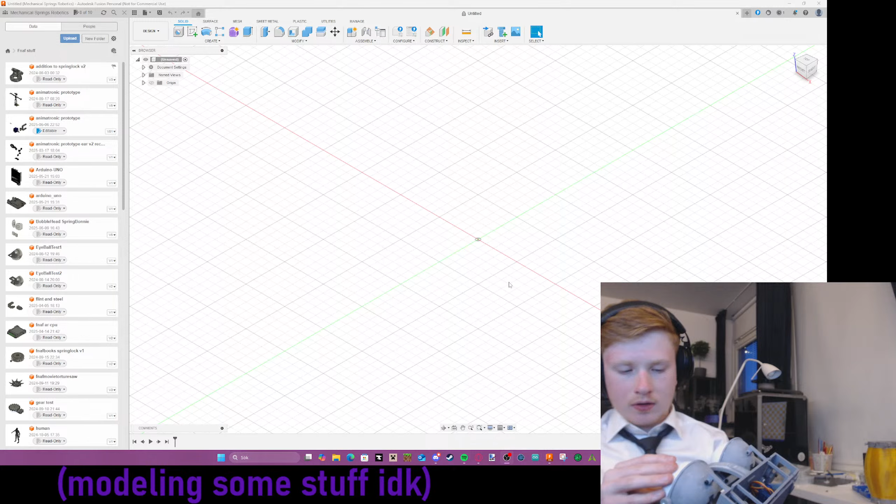Oh yeah, I forget. Sanding is a thing, but I haven't done that yet. And I don't want to do that right now because, sir, you know I'm a lazy man. I do not do stuff that I say I'm supposed to do.

Yeah, sir, can you let me put on your eye? Yeah, there we go.

Oh, I know what I should do. I should finish the new jaw model idea I had, like having pistons on the side with springs.

Voice crack it down. Springs. Kind of funny making voice crack. Voice cracks, not noise cracks.

Sir, what springs shall we use on your thingy? I don't even know how big I can make the thing. This is too big.

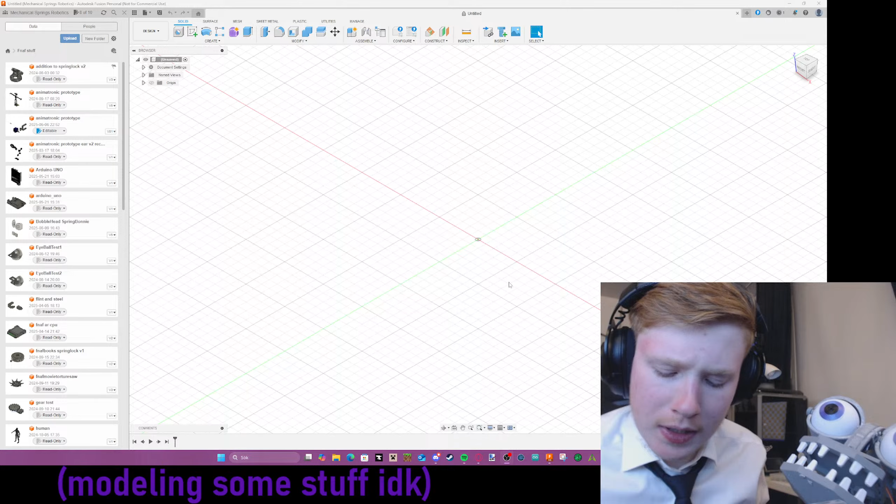But I need it to be strong at the same time, and I need to have a lot of them so I can make more of you. That's not strong enough.

What if I just put springs on your jaw? This one could work. I have a lot of these, and they do reach pretty well, and they're pretty small, so they can fit inside a part.

Alright, should I put you like right next to me? No, that won't work. You... Oh, damn, you can stand there. Don't really stand, but you sit there, while staring you guys down, or whoever's watching. Time to open the funny of my 1.5 years of pain.

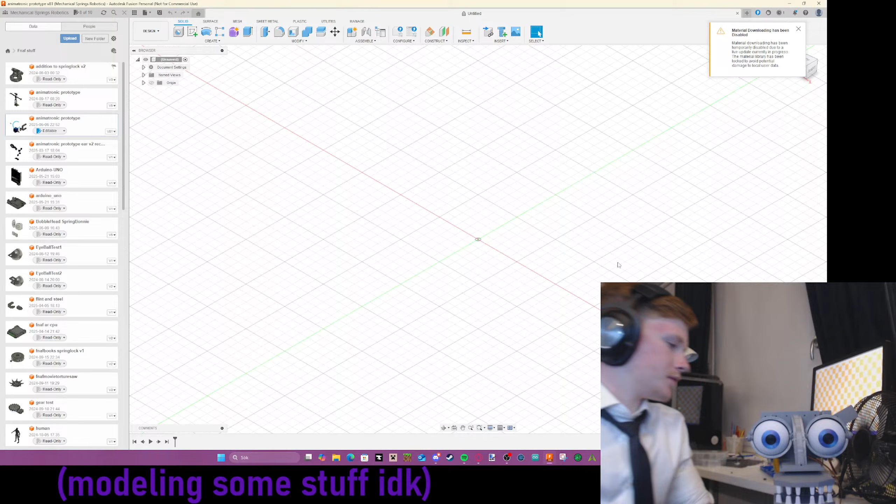Yeah, you're beautiful. One reference is out of date. Oh yeah, I forgot about that. I don't even use it that much. Did I have a different version that I didn't save? I'm pretty sure I shouldn't have.

Yeah buddy, let's do one of these so we both can fit in the screen. You're taking up a lot of space.

Anyway, how smooth are you? Yeah, this part has to be a little bit sanded. This part is like done though. This middle one. Damn, I'm so fucking

full from eating cake because I just started summer break from the end of middle school, and I just remembered I have a fan right next to me. That's why it's so hot in here, and that's why I added the fan, but I never started it.

Hopefully my mic doesn't sound too bad now.

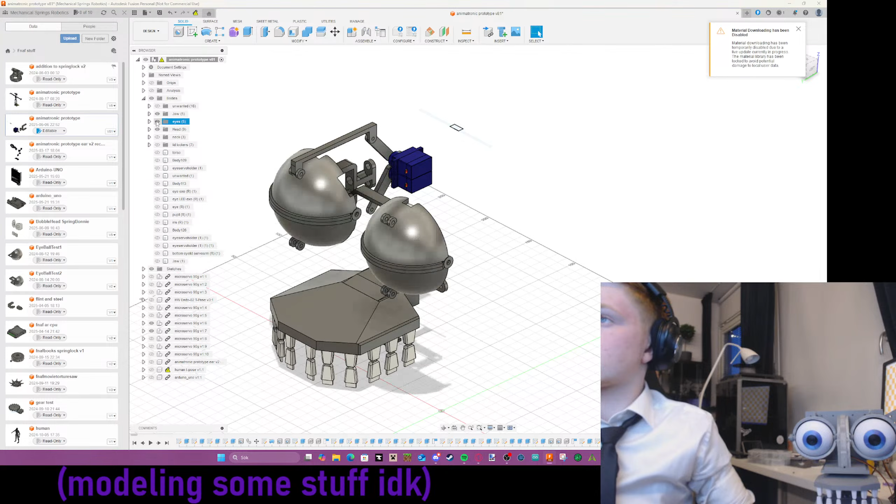How about a bit the jaw? The eyeballers. Where's the bottom jaw? Here it is. Both this jaw and the other jaw works. I just gotta add holes.

Actually, should I screw holes into the side of your thing? That's printed flat, I think. Yeah, then this is not printed flat, so it might not be possible.

Wait, what the hell? That's weird. Alright, let me just hide this thing on the side. And hopefully I can see if okay, my stream looks decent enough.

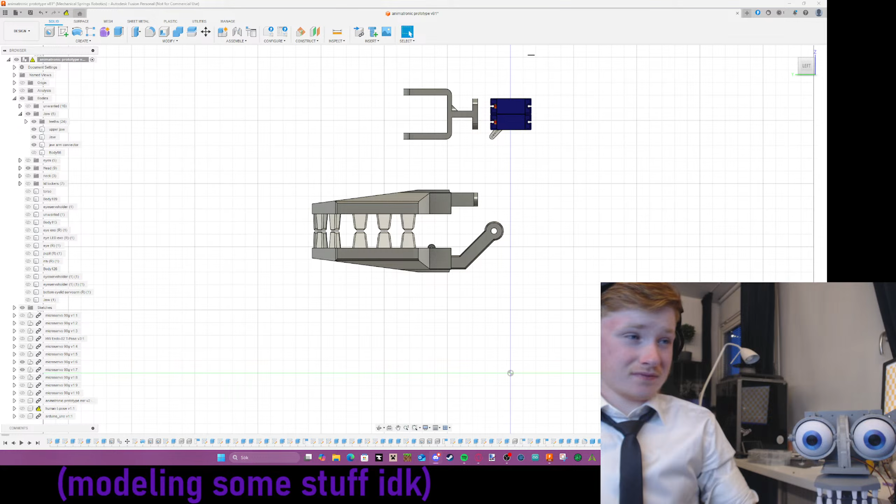Whew, alright, yeah, maybe I should... what I said before to myself, that I shouldn't have headphones on because headphones, they can really last for a long time.

How should I do this though? Since I want to get the middle points of both of those at the same time, maybe I should just start out doing the top jaw because this one will always be the same. So I can't select the middle point, but I can make a middle point by doing this.

First obstacle, what screw do we use? I'd say we use a screw that fits this spring, the hole of this thingy.

Okay, maybe you shouldn't be so creepy and hold your eyes widely open. There, be a chill guy. Oh no, don't, that's not very chill. That's not, that's not chill. Yeah.

My screw. My screws. My screws.

I don't like how you're wiggling. Okay, I don't know, is it the fan that's blowing you side to side, or is it the table? That's the table. Okay, it's the freaking table.

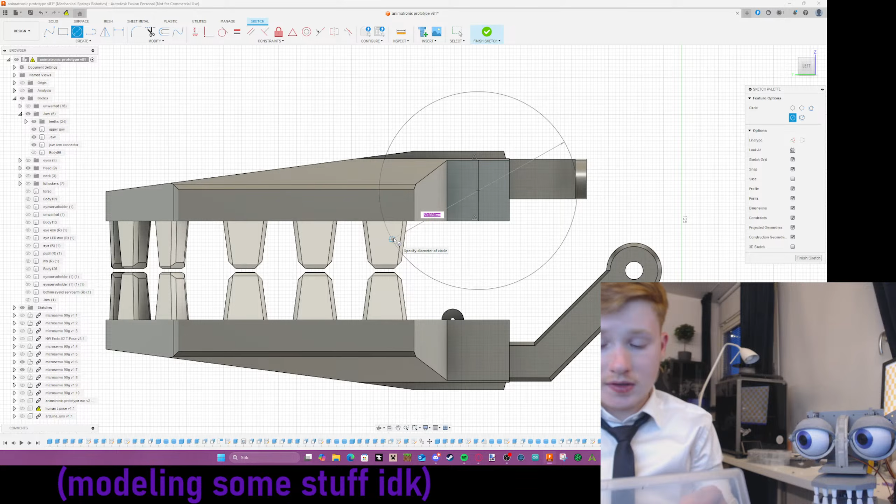That does not fit in there. I think this size fits in there. Yeah, no, it doesn't. I mean it fits, but it's just itty bitty too big, and I don't really want a lot of friction. The smallest one works, and it just fell randomly.

This where it shouldn't be. Let's check out secondary... thingy, but my desk is so freaking messy, so I can't rotate it that easily. Is there any different size here?

That's the same as before. Realistically, I could just do this and call it a day, adding springs on the side, but that's too lazy. Which I kinda am, but not that lazy.

Let's see, are these the same ones? They are, okay, they're the same size. And yeah, this is the one that's too big.

I'm actually gonna wait, is there a lower setting? Oh yeah, is it? Yeah, it's lower. Whew, just got a bit cold. Yeah, it's still cold. I'm gonna turn that off. Before I was sweating, but not right now.

So I think I found my favorite. Just gotta double check. Yeah, we're gonna go with this one.

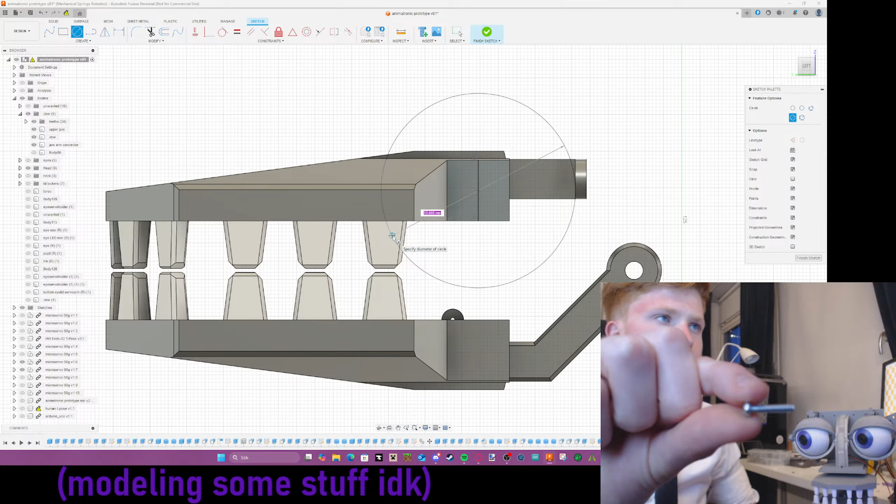Not that fun to watch a screw that I'm holding, but you see, it goes pretty well. And with more parts, it would probably go like that, and over here would be where it actually connects to the jaw.

And I got longer ones, just in case, if that doesn't work.

Okay, I might have found my actual personal favorite. This one is just one size bigger, and apparently this one can screw on, which the other ones that I have on my desktop desk does not fit in there. But this one does, apparently, if you screw it on, which you see is also much more sturdier. Doesn't really wiggle a lot.

And there should... yeah, right here, there's a longer size. Just a small difference, but that can do the trick. It really can.

Let me just double check. I just remembered, I don't need to activate desktop sounds because I'm not using any headphones right now. Let's just see real quick, any new messages? No, just had to double check because I don't have my headphones on.

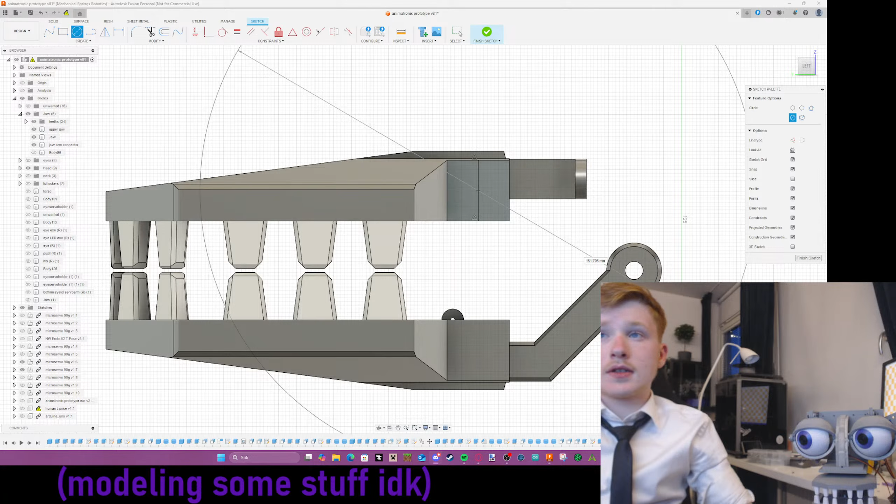Let's just double check here. That's good, that's good. Okay, so we know which screw we're using.

Oh, there was a... that's good I didn't drop that screw that was stuck on this thing. Let's open up OBS again, just in case.

Let's check here, how big is this? Guess we want... oh, no, I remember also why I wanted to get a higher size, because these thingies are like threaded inserts. You can heat them up and put them in plastic, or any material, and you can screw it on like a bolt.

And I only have it in one size, so using this one would work, but using this one that we had before, we just slide in. I could have made a crazy sexual joke about that thing I just did, but let's not do that.

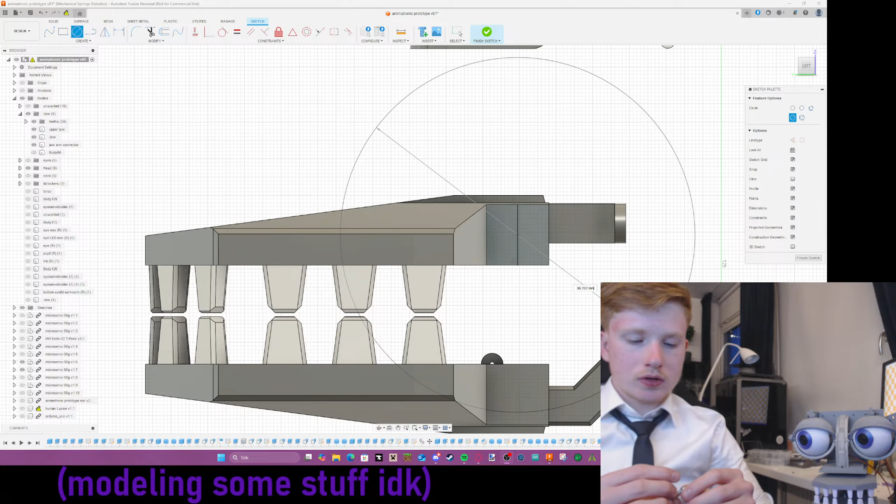So I'll use... ouch. I'll not be measuring the screw, I'll be measuring the heated insert, aka the tippity top, so we can slot it in perfectly.

Which, let me guess, 5.6. Close enough, 5.5.

But then 5.5, but a little bit more makes it fit easier, right? So we're gonna make this. Oh, I gotta move this off my desk. No, don't fall now. This guy's just on top of a drink I have right next to me.

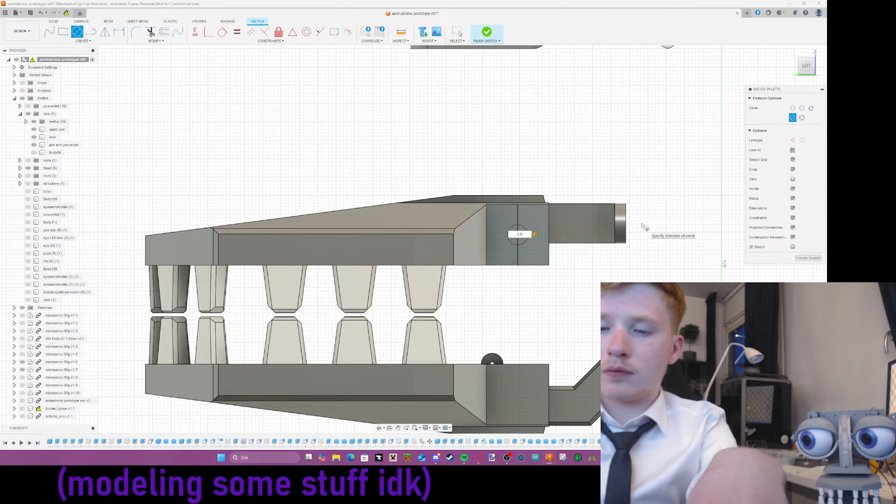5.5, but we want this to be a bit bigger. You would have like 0.1... wait, yeah, wait, I'm just gonna make it 5.65 instead.

Or actually, I usually offset it by 0.1, so it would be plus 0.2, which would be 5.7, which I think should be enough, right? Right. Plus, it's gonna be heated anyway, so it might just melt a little bit through.

So we got that done. Oh wait, actually we need the thread thing, because I need this thing to slot into a 3D printed part. Whew, this will be tough.

Okay, and why is it hot now? Why did it suddenly get hot? Alrighty, I'm just gonna do this.

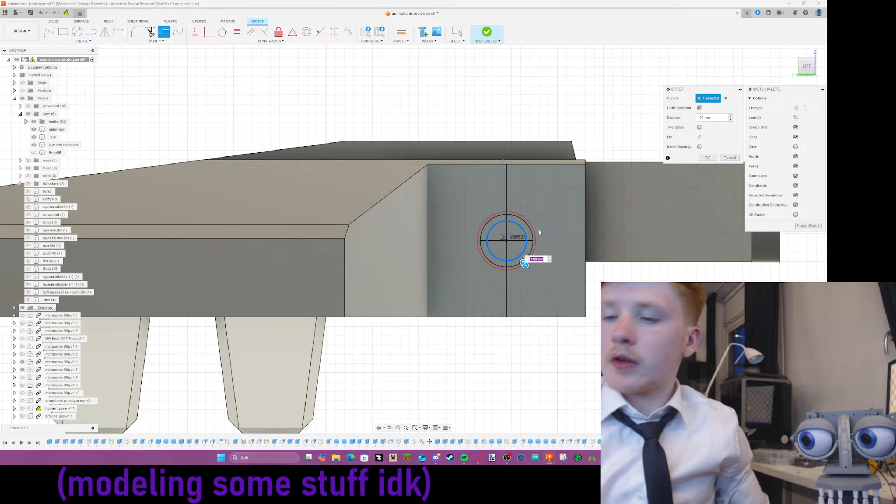Wait, we actually gotta measure how thick the ring around the thing is, so it assumes like... wait, let me guess. I'm not looking. That was 4.4, 4.3. So I would guess like 4.2. Never mind, 4.4. Okay.

Which kind of makes me... oh no, I was gonna say scared, but I'm gonna have a thing around it so it can't move. So yeah, we just needed like two.

Okay, wait. How much, how much? 4.3 to 4.1, you would say like around 1 millimeter, but I would say... what? 1.5.

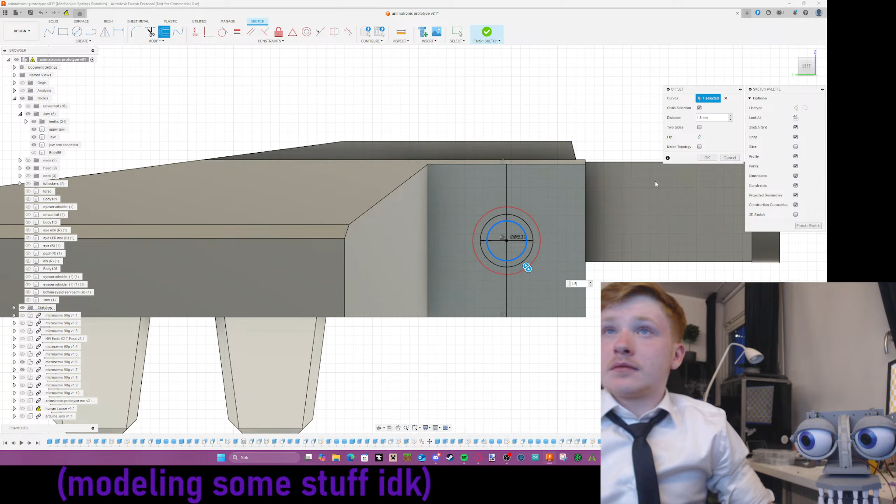No, I'm really yawning today, and suddenly I have tear liquid or whatever coming out of my eyes for no apparent reason.

Anyways, voice crack, damn. And apparently now, are you making me sick? Oh no, it must be the air blowing into my eyes, making them dry, making me cry. Did that rhyme? I don't think it did.

Hopefully I'm not speaking too low. Hopefully I'm speaking a bit loudly. Okay, not loud, but like a normal amount of decibels. I don't know.

Okay, why the fuck am I so sleepy? The clock is only 11 p.m. I usually stay up to 1 a.m. in the morning.

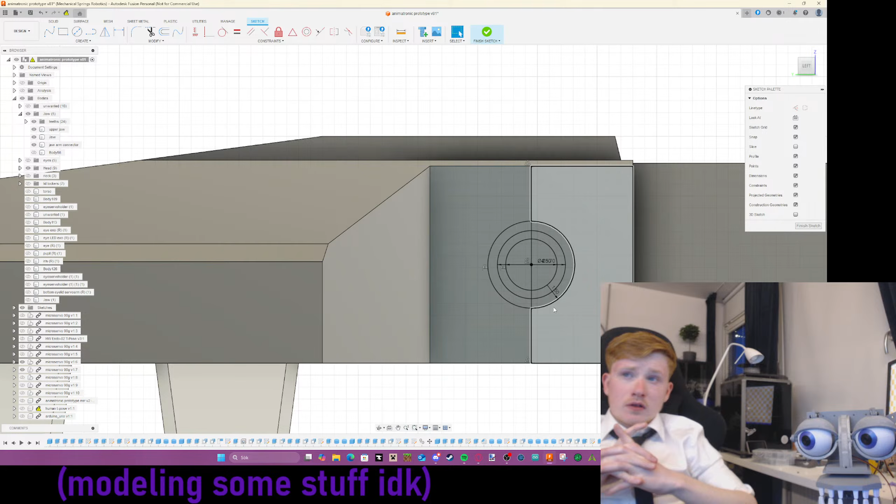Okay, we gotta think. So we got that thingy, and we got another thingy. What was this thingy for? Or was that thingy? So we need that thingy, got another thingy. Okay, I get it, I get it.

Oh yeah, we gotta offset this, the middle thingy, which goes in. No, no, no, no, no, no. This is... yeah, we gotta do it from this thingy.

So this thingy should go like 2.5, 2. Since it's only like 0.5 millimeters left, I will make this 3.5, because that leaves 2 millimeters, which should be enough. Yeah, that looks all right.

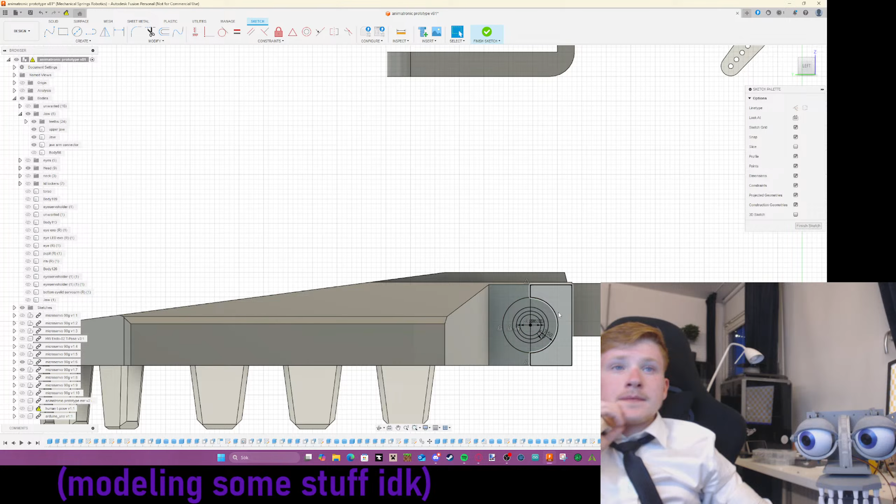What the fuck? Apparently I'm very tired. This should be it. Yeah, that should be it.

Okay, so this was the thing that goes on the inside thing. I'm gonna take a look here. Oh shoot. That's like around 8. I would make this 1? No, 10.

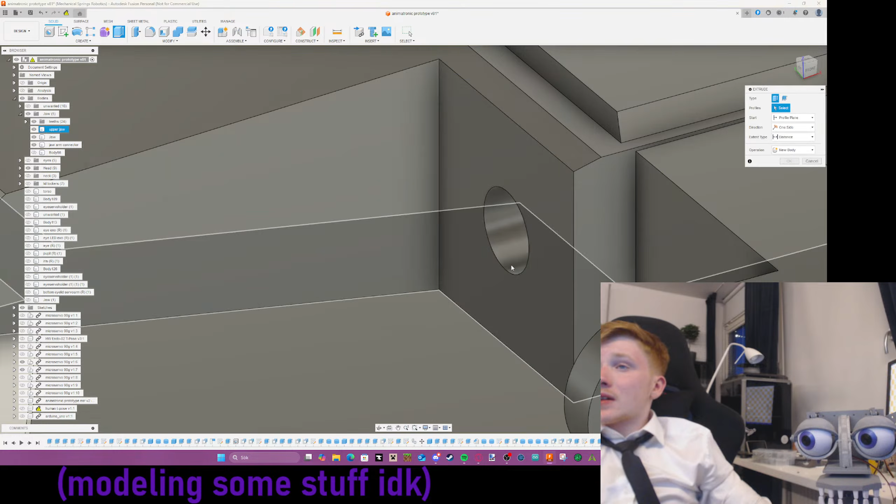Or actually, I'm gonna make it 9. Okay, no, not that way. Not that way, sir. Okay, and it disappeared. Yippee, attempt to find that sketch. And it was pretty easy because I have an old folder.

So this should be it, right? 2. Oh! I scrubbed your eye. I'm so sorry. How did you even fall? No idea.

2 millimeters. Okay, that just made me think of something else, but that's not true, is it? Jaw. And now we have this thing. Join. We'll hide this. Okay, good.

Okay, this is... wait, let me hopefully be able to bring out a little picture of what I'm making. And why can I not scroll? Okay, it was already on top. Oh, here it is. It should be.

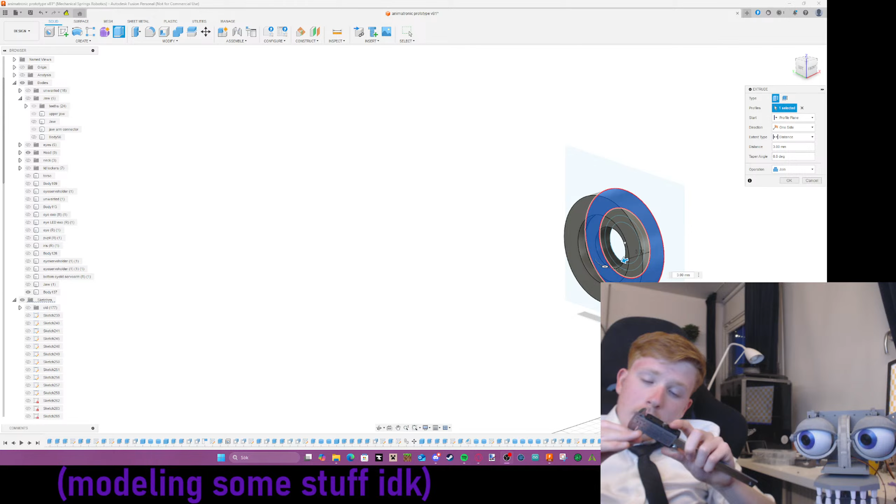Yeah, let's see how. Oh yeah, wait. The thickness of this will be 0.669. I'm gonna make this... wait, how long is that? 2. So, 2.7. Hold on. And then we got...

Oh yeah, this is the actual walls. Wait, did I do this? Said, oh my god, I did. Oh my god. And wait, did I do the wrong thing? I did. Jaw. There, do both of those. Why did I wait?

Oh yeah, wait, no, we want to do this. I know the way. Oh, it's not a spring lock, even if it looks like it. And I did not type it in. Holy shoot. Is this for that? How do I forget something I made like some minutes ago?

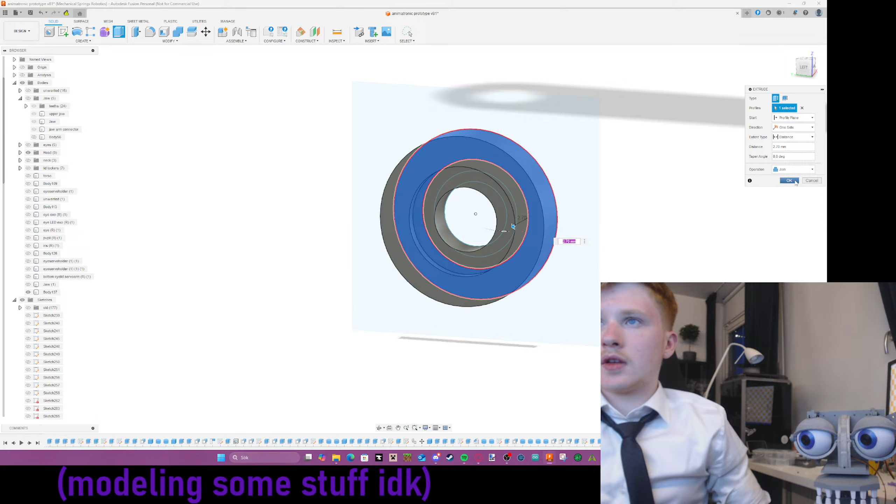Oh yeah, that should be it. 2.7, and then I gotta get the half of this. Okay, like 5? 5.2? 5.2, okay. Which is... damn, 2.6. Oh damn, that's a 3.

Holy shoot. Ah, fuck, I gotta double check with a calculator, what the kids use. Calc, slang for calculator. 5.2 divided by 2. Yeah, 2.6. Nailed it.

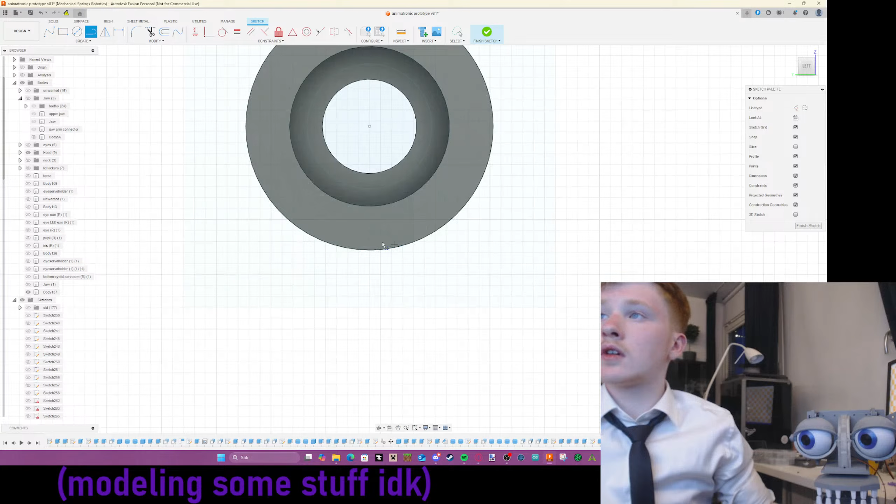And then I just create another sketch on here. Oh, oops. How we doing? How we doing? We do one of them thingies down here and one of them thingies up here, because then we could do a spinning of that. And then...

We can add, oh yeah, that goes over here, which we then have go down here. I don't know how long I want this to go. I'm just gonna make it go like what? Oh, freaking out, I gotta stop moving my arms. Stay still. There.

Freaking hell, that's happened twice now. Is that even on the right? Yeah, it's in the right place. 15, yeah, that's a decent amount. I can just change it in the future, or like, what could I say in a couple of minutes? 15? Oop. Oop. There.

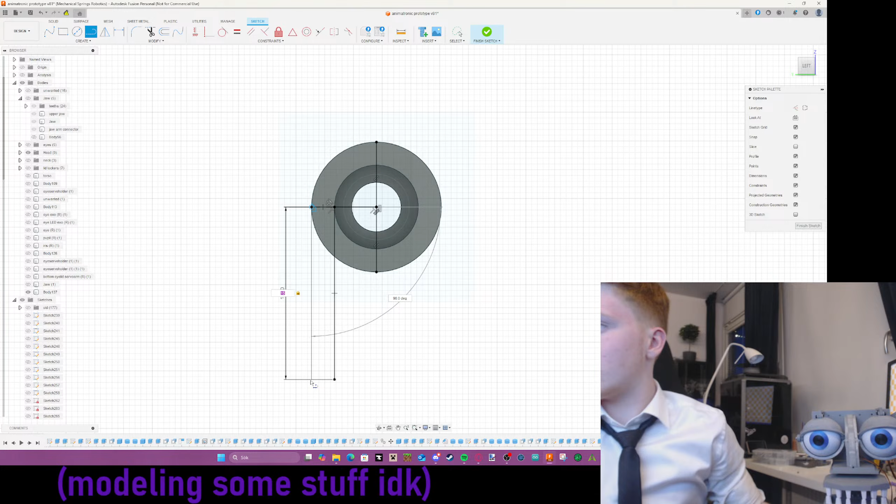Let's think, did I do this right? I should have. Let me just double check. Is this? There should be... if I haven't done wrong, there should be 5.2 or close to it. I'm stupid as fuck.

I'm stupid as fuck. Or am I just being stupid? I think I might just be stupid.

Where did I get 5.2 from? That was this, yeah, that was the circle around it. Then I took half of that.

The confusion is real. Oh no, I'm just gonna have to go with the flow, I think.

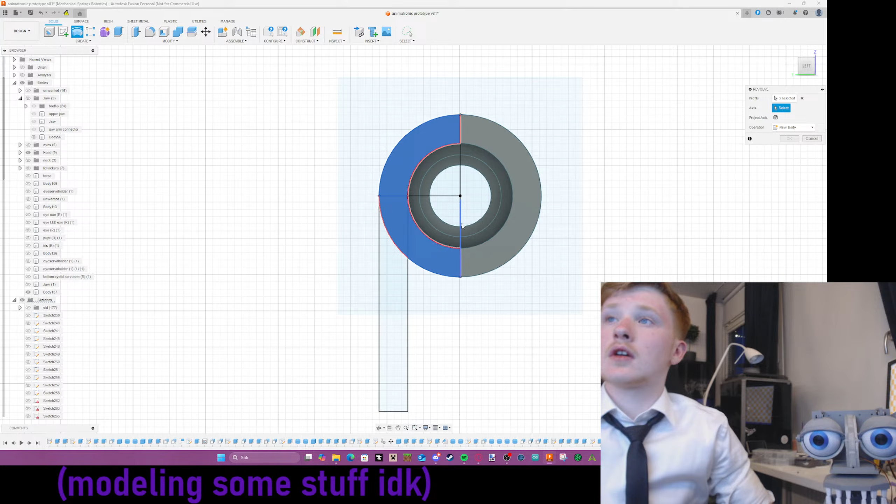Oh, no, not that. Yes, yes, okay, yeah, there, good. Then we do this, now 180 degrees. I almost hit you again. Why do I have you right next to my hand? I don't know, but you know I'm stupid, so.

Why did I even make this a sphere? I could have chosen to not make it a sphere. Oh my god, I just have to do this and then I can just extrude all of that.

And then I just gotta do all of this nonsense. Holy crap, and I gotta do it all the way. Oh my god, bro. How long is this? 2 millimeters? Really? Okay.

Do it towards... oh, can I not? Okay, sure, just gotta do it by hand. Oh, what is going on? Select that, select that, 3.3. Okay, okay, wait, what the frick? Then we just do wham wham.

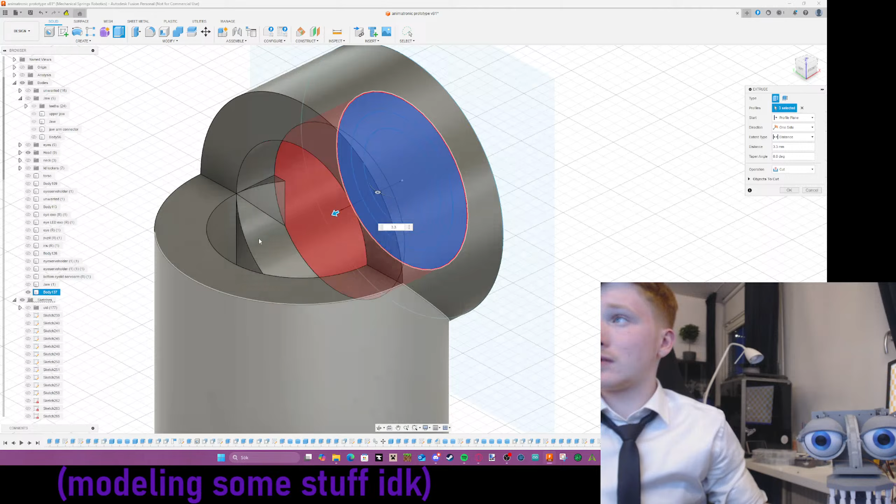Oh my god, oh no. Crap. 3.3, that should... that's not perfectly... oh yeah, because I need to add 2 more millimeters because that's the thickness of that thing.

Yeah. And then I just... no, oh yeah, because I gotta do this whole thing. Cut, and then this 2 millimeters. I assume that's how it was.

And then we can just do what I should have done before. Extrude, okay. Extrude it all the way over here. No wait, no. Oh, and then I gotta make that hole. Okay, bro, what the frickety hell?

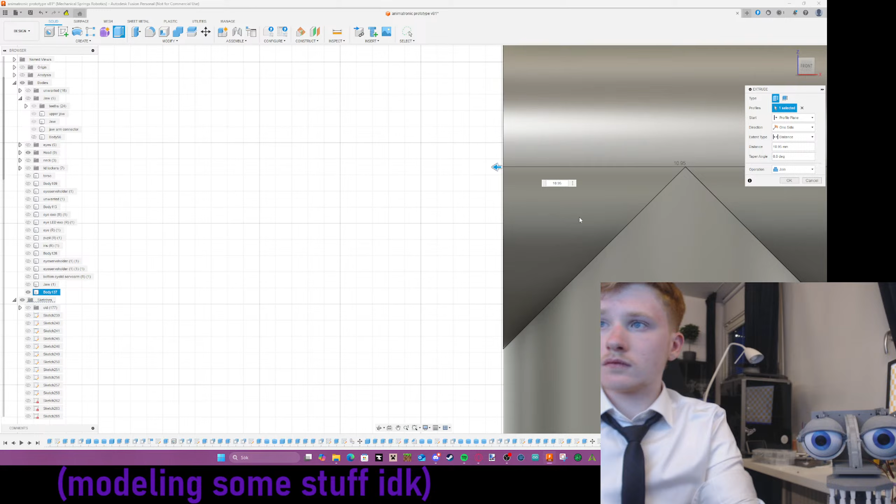11. How about 10? Okay, no. 10.5? 10.75? Or do I just type a random number and guess my way to there? It looks about fine.

Zoom in, lag my computer. Yeah, that looks right. That looks... okay, maybe it doesn't look right, but looks good enough. Alright.

I'm about to cry, I have to do this again.

Okay. Well, we'll just do this whole thing again. Oh my god. Yippee, I love repeating stuff that I already done because I made a mistake. Woohoo.

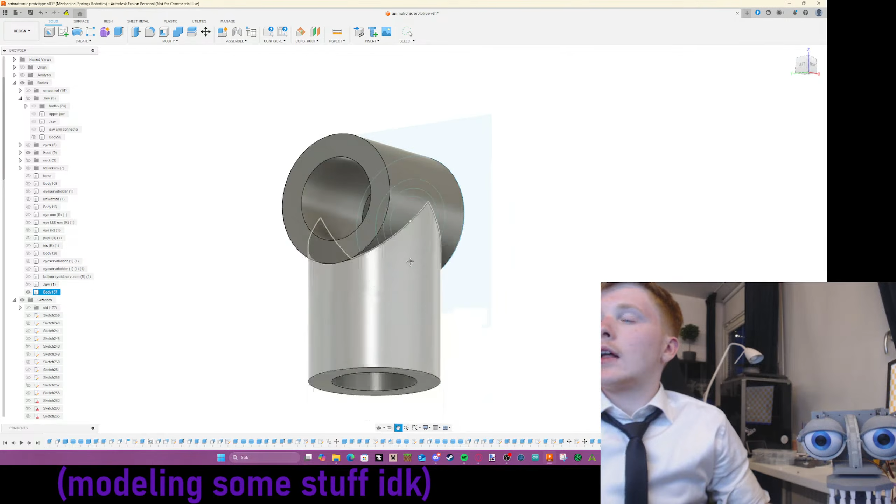And where the fuck's the hole? The hole is gone, the hole is gone.

Painful hours in Fusion. Is this where you wanna be? Can I not move you up? I cannot select that as its moving point. Okay.

Please... oh wait, is that perfect? Oh yeah, because I had it 15 millimeters. Holy crap. Is that... oh, it is.

I think I might have done some slight miscalculations. Yeah, because that hits the thingy over there. Ooh, well, it's not going well.

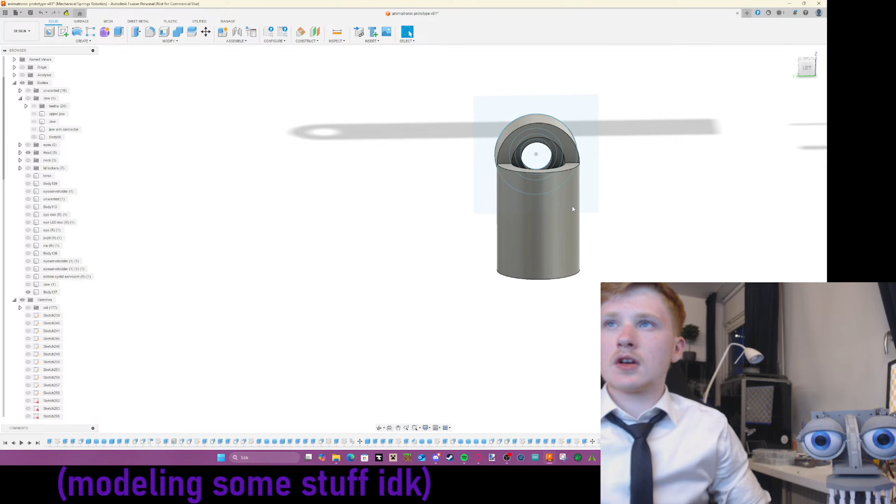But I think if I just... oh, I press Control Z. I'll just go back in time to where I did this thingy, and a bit further back because I don't want to watch all of this pain again.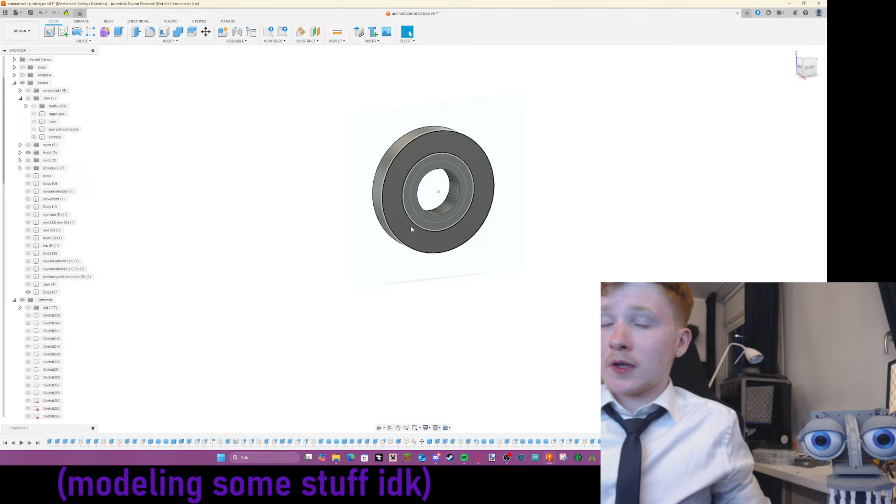Funny thing about all... okay, wait. Funny thing, I don't remember some of this even though I made it like less than a half hour ago. Let me think, even though I properly can't think right now, because I'm a bit sleepy. High energy me will like figure it out.

Okay, so this thingy over here, it's supposed to be for this, I guess. What was this like? Oh yeah, 0.7, which is why I made it 2.7 this way.

Then I added the width of this to it, which was... it was 5.2. Or no, it was 4.9.

Hello, Mary Gomes. I was about to say games, but it's Gomes. And I was also about to say gnomes, but sorry.

4.9, I think I should... wait, no, I should wait for that. Wait, don't I have a freaking calculator around here? I should have. Oh yeah, it's right here. Yahoo, calculator. Totally didn't steal it from middle school. Oh, okay.

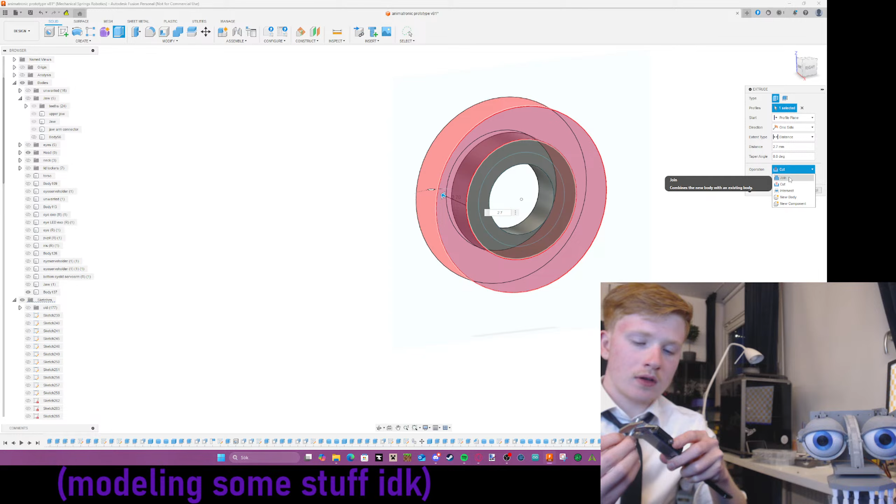4.9 and needs more space, right? Oh yeah, because, oh yeah, that's probably how we got 5.2, right? Because it didn't do any friction. Yeah, that's why. But I think there's no. Is it too large? No, it's good enough.

And that's why I did 5.2 divided by 2. That's 2.6, yeah. And then plus 2.7 equals 5.3.

Wait, no, that doesn't make sense actually because of the thickness of the walls, that also has to be incorporated, right? Wait, no, that doesn't. Wait, hold. Brainstorming. Does it make sense or does it not make sense? Because we have that thingy go around, but we don't have that thingy go around.

It makes sense. I don't know how I thought it didn't make sense. Okay, why did the camera suddenly become a bit gray? I don't know.

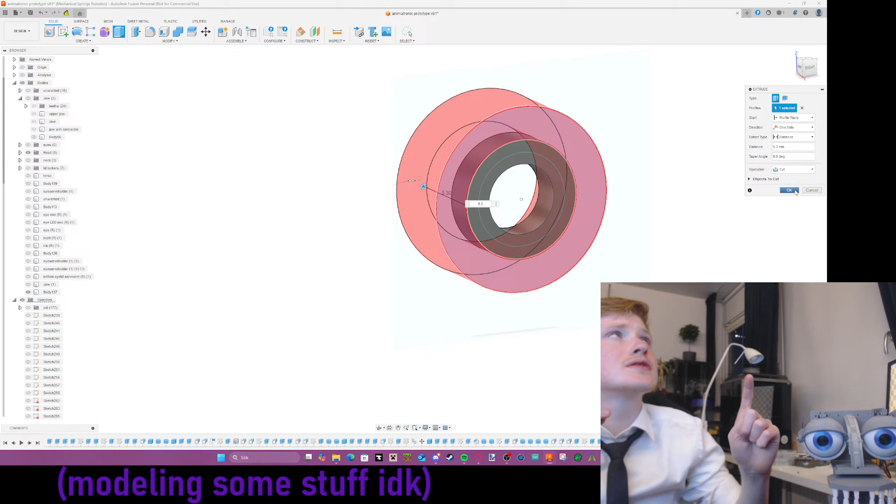5.3 apparently is what the calculator is saying we should put it as. I'm gonna trust you, Mr. Calculator. Why the fuck am I talking to a calculator? Oh wait, no, it doesn't make sense because the wall will be spinning around. That will collide. I think no, it should work.

Isn't it crazy how people hate on that song? I'm not a hater, but the first part I think is fine, then the other part is like people hate on it. Anyways...

Where is it there? Okay, so what happened is we had the wall, we had the wall to like from here. Whoa, whoops, what's going on? 2 millimeters, yeah, we know that. Here to like, I don't know, 15. Then we had it do a revolve like 360 degrees, right? But that hits this area, which is why we need to cut it. But that doesn't make sense, does it?

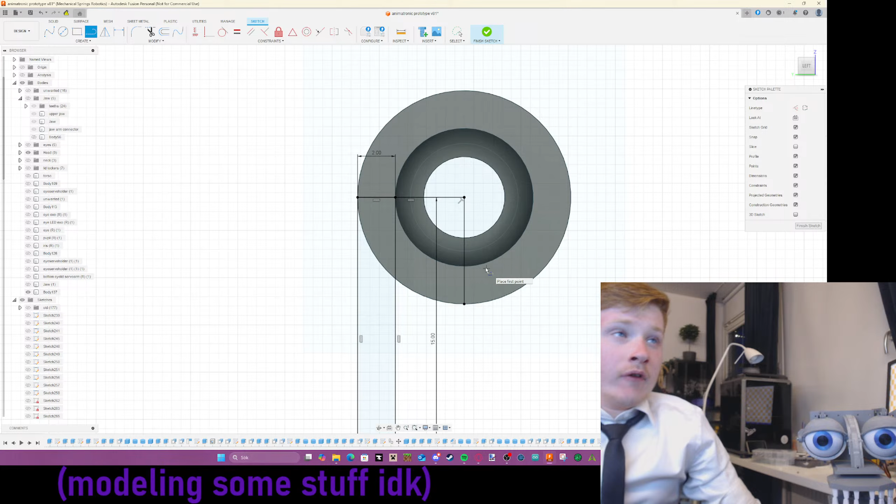Well... oh, whatever works, right? Yeah, damn, that's crazy how tired I am. Doesn't really make sense. I mean okay, I've kind of been through a lot and I've eaten a lot today because of restaurant traditions with my friends.

Anyways, so the distance from this point to this point should be the distance we should do this. 5.65? Ooh, pretty specific, don't you say? Oh hold on, somebody's going to the room soon, I think. Oh yeah.

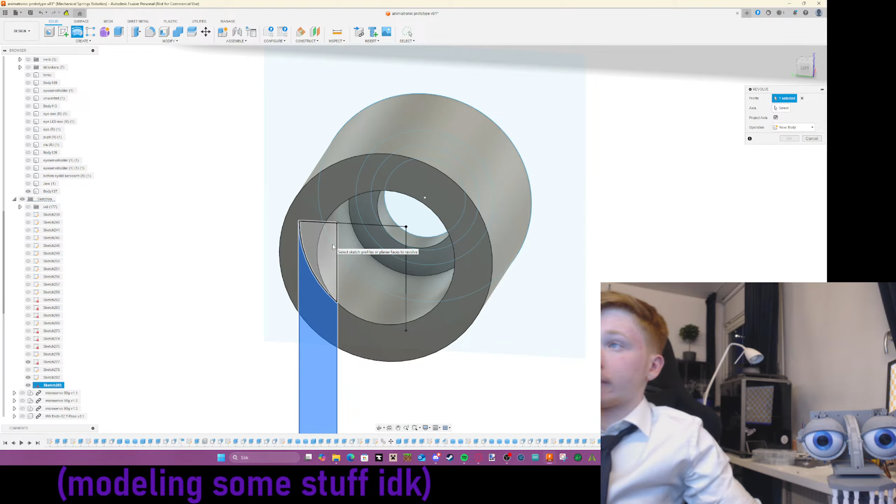We just need that part, I think. Oh, that's—it looks like a weird sphere thingy. Join. Not for a byte.

Okay. And—oh wait. Hold on. Oh yeah, wait, this is the thingy. So didn't we make a cylinder down here last time? Here, and then make it go up.

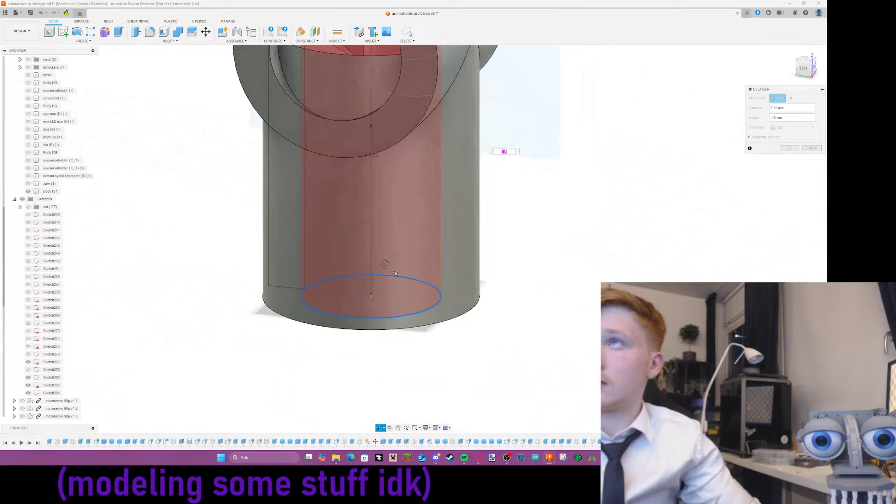Don't fall again. 15, but it cut into the part, which shouldn't happen now, okay? Please tell me—it does? The fuck? That was close yet again. Don't have a proper stand for him next to my mouse. Okay, I'm actually looking right now. Yeah, that's a pretty bad spot to put him. Too tired, too annoyed to make it better.

But that doesn't make sense though. Let's just skip that thing. Because, wait, hold on, the distance between this and this should be the same towards this. Whoa, wait, did I? Yeah, I did calculate the distance. The distance between this and that should be greater than this. It's not, because... oh, the distance between here is not equal to... the distance between here is the distance between that, not between the middle of the spring thingy. It's the distance between this thingy, which is totally different.

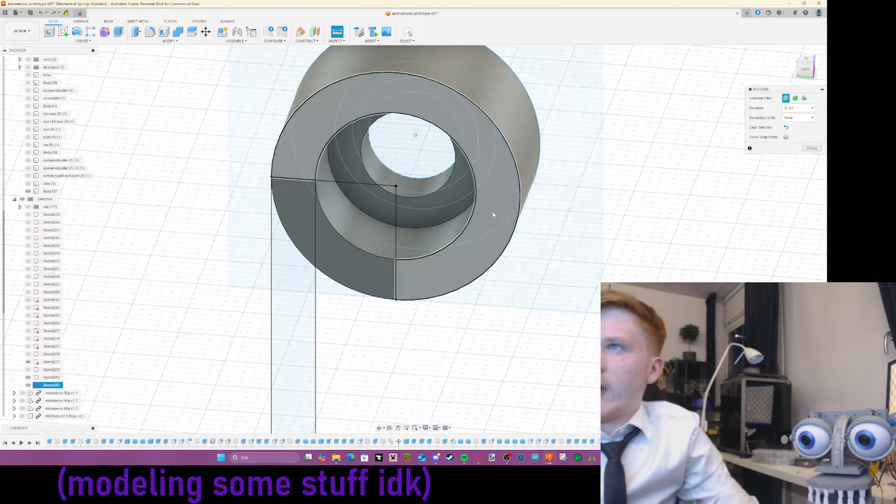I think. Wait, hold on. Okay, I'm just gonna do this. Wait, I can't. Oh freaking hell. Do that. Diameter 7.30. Yeah, that's more than 5 point something.

Okay, we got brain explosion right now, guys. We got brain explosion. Well, you don't have a brain right now. I mean, you have a thing on the back, but I don't think that's a brain, sir. Guess that's a PCA that controls your muscles, servos, motors.

Okay, so what do we have to do? There's a little lesson in trickery. We gotta find this thing again—it always disappears. So we gotta remove all of this.

Yeah okay, good. Now we do—frick. 5.2. Oh that was—2.6. Okay, that says 2. I don't know it because I never pressed the equal button. Yeah, 2.6. Damn, oh my god. Okay, what the fuck is that face?

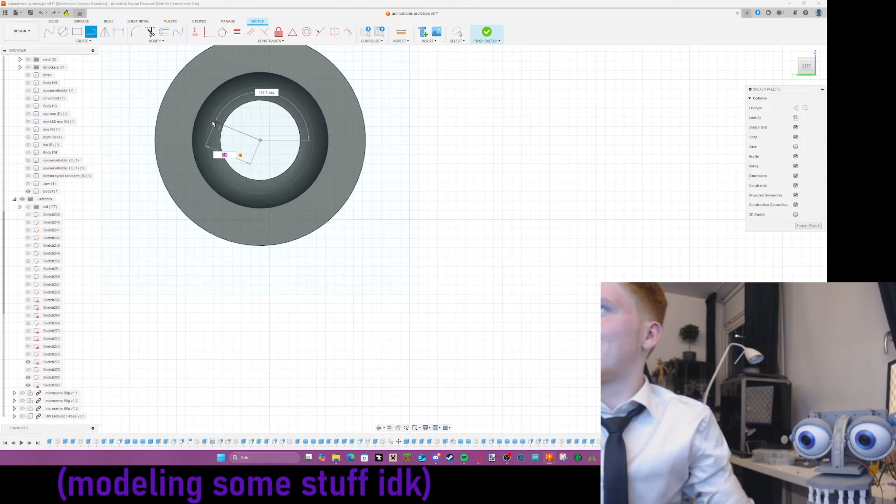Okay. Okay, let's do this. We do... wait, why aren't we just doing this? And then we do this too. Hear me out now—this, it should work, okay?

Wait, so if I do this... okay, I thought I was gonna make some great thing. No, no, no, apparently not. We just have to rotate it down there, right? Which shouldn't collide too much.

Hopefully. Famous last words. I don't— why would it be last words? I don't know, I'm just saying shit at this point. Um.

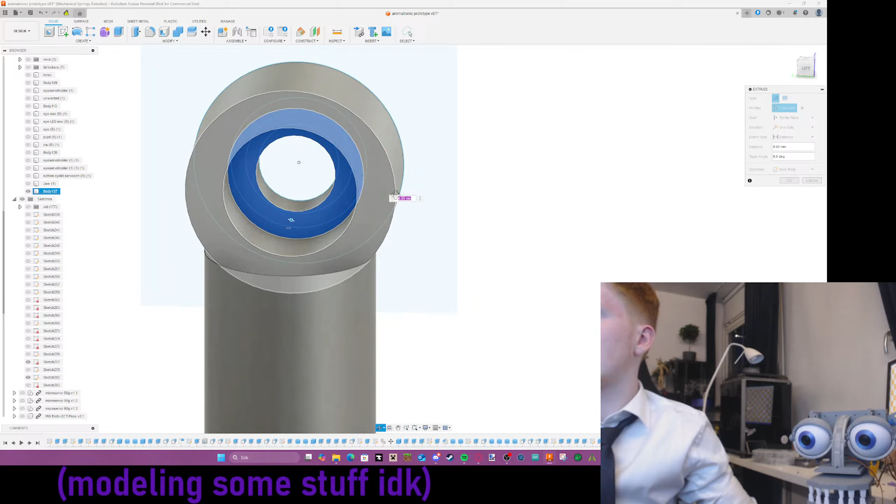And then we have— wait, that didn't collide, but this will collide. Why didn't that collide? Because it went to the wall over here. Mm-hmm, mm-hmm, uh-huh. Oh no, I remembered.

I remember. What do I remember? No, but I remember that this is supposed to be a piston. We're just making this part fit into another part.

Hmm, how sure am I this is gonna work? Pretty sure. Okay, what the fuck? Okay. So what was the thing I was thinking about? Wait, I gotta think again. I gotta think, but you guys won't be able to hear because I'm thinking to myself, because I'm a weirdo. Um.

Mm, yeah. Y'all just hear me say yeah, but y'all don't know what I just said yet.

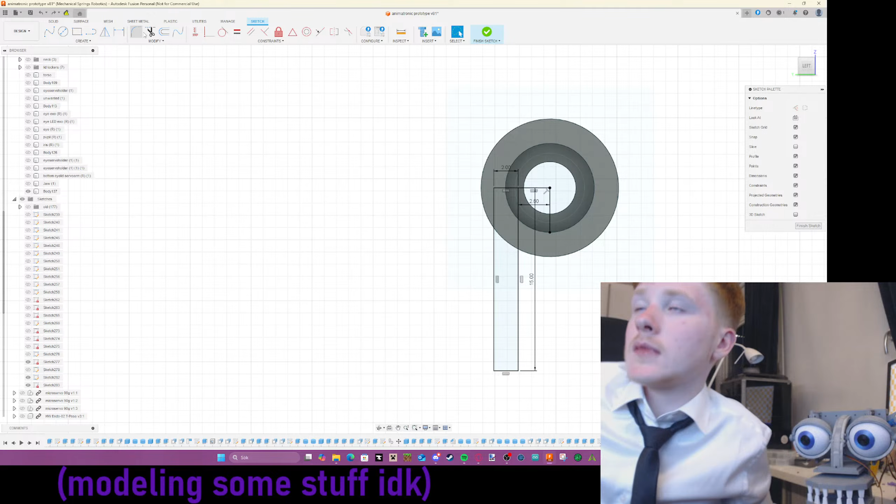Where did it go? Oh, this is rotated. Don't know why, but the thing I was thinking is that this is the thingy that we move, but then we need another thingy on the side, so it's like a piston, right?

I'm not expecting a lot of people to understand what I mean, but maybe someone will. I'm kind of scared about the assembling process though. It'll be fine, right?

One thing though, so it will move left and right, right? Let me get a demonstration somehow. Imagine this is the piston, right? We have this move. Oh, this is kind of like it, but a different way. So this would be closing. Wait, no, it's actually like it. So no wait, this is making it open.

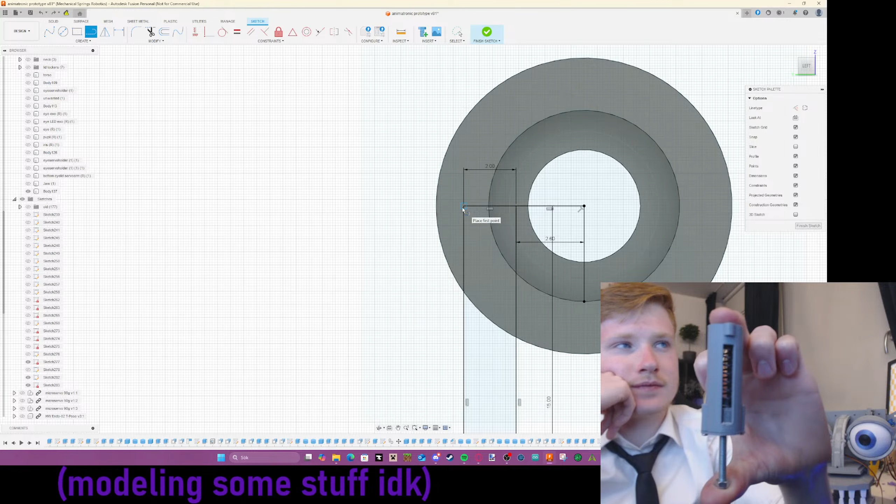So, what I'm thinking is we have this hollow part, like on this, but we also have - I don't know if you can see - there's a thing in there that would slot here, so it can't turn like this, right? So it makes it more stable. So stable.

Whoa. Oh wait, no, never mind. The problem with making it work like that is - wait, couldn't I just use this? This wouldn't fit right, but I could take inspiration. I just have this bar here not go down. Wait, yeah, I would have needed it to go down, so when it goes here it still has a line of weight. No we don't. Oh yes, it does. Yeah, totally does.

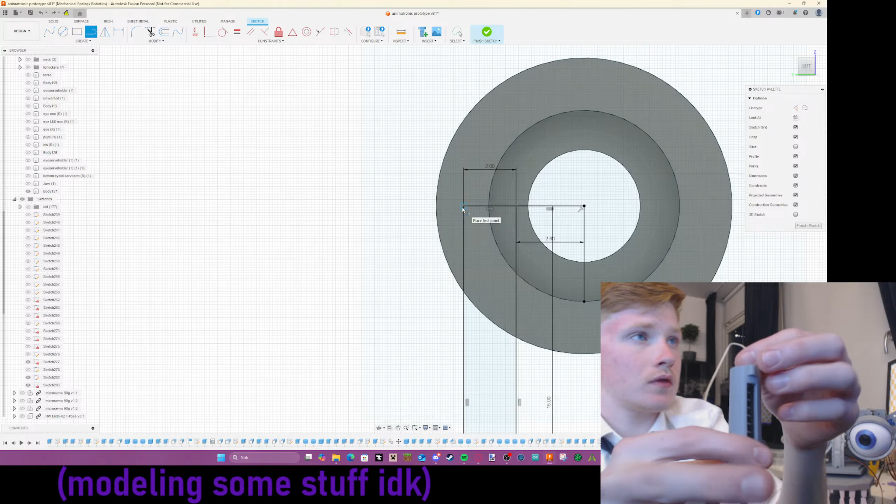So then it comes up here, so this would drag here instead of pushing. So when you drag it, this would move up, but then it would want to go back down. Very stupid, this describing - but I want to add that middle part, but it's hard because this isn't just a part moving on the inside, it's a spring moving on the inside. Wait, let me think again.

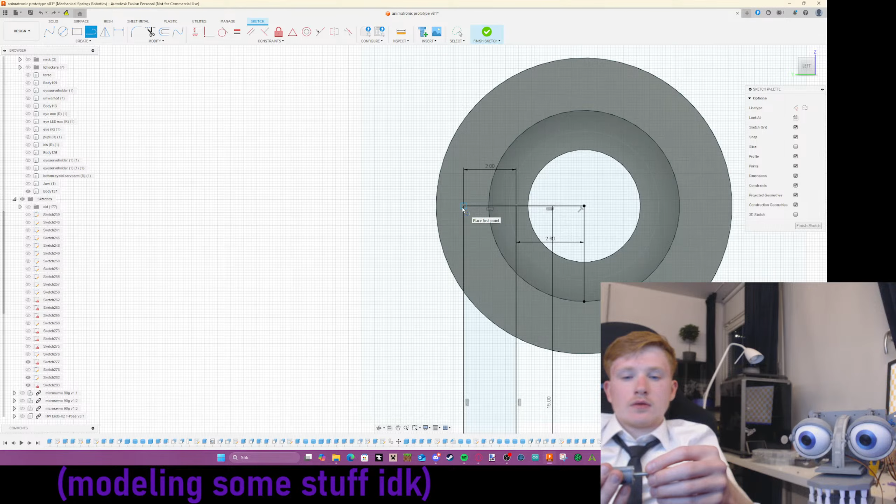I kind of got an idea, and I kind of don't. So, another reason to have that thing is so it can't go too far out or too far in. So this thingy in the middle would stop it. This is a very poor description of what I'm thinking about, but it should be good enough. Hopefully.

So it will both stabilize it and provide - yeah, providing structural support. No, what the fuck am I saying? Making it move better, and oh-

I gotta put you over at the other table. Sorry for anybody wanting him to be in front, he just keeps falling down. That was not a reference, okay.

But let's try and do this. I just noticed this won't align with this because I need to have space between it. So wait, I just remembered not to try. Oh no, but yes, that would be okay. Yeah, that makes sense.

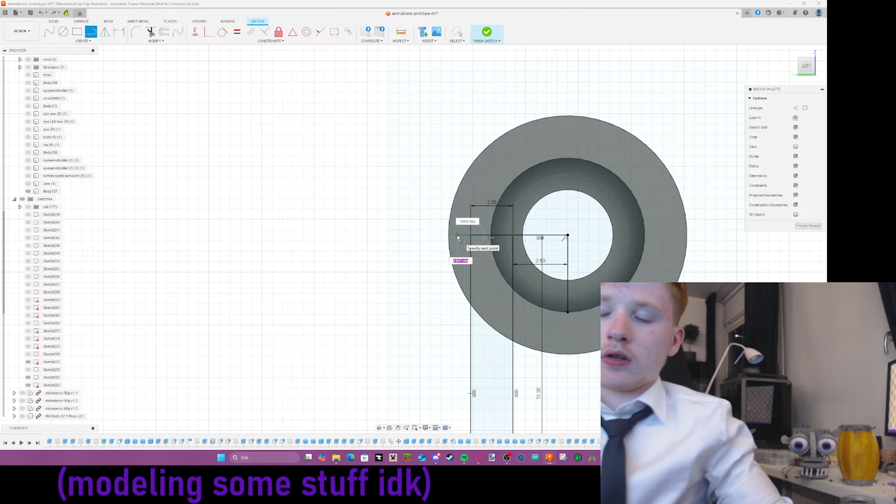So 0. Okay, wait, what the fuck? Hold on. And why did that open that thing? Let me just take a picture of something real quick.

Is this mine? Yeah, it's mine. Parents wondering if I lost a bus card. I forgot if it's called a bus card.

Anyways, 0.1. I should make it 0.15 for better measure. Or luck. Anyways.

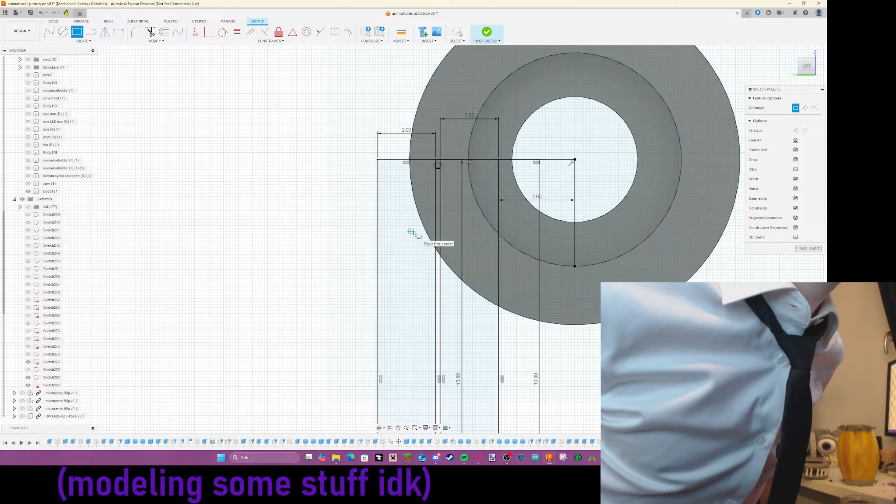Down 2. Oh my bad, that's - okay, so you can - oh damn, you can tell that this is gonna be a bit more scuffed. Damn, that's a bit scuffed on a smaller screen. Wait, hold on. Is that worse? Wait, hold on, I just gotta look here. Okay, it started to look better now because that was more pixelated.

They should work, because like I know what I'm trying to do, but I'm not really sure if it's gonna work out, you know?

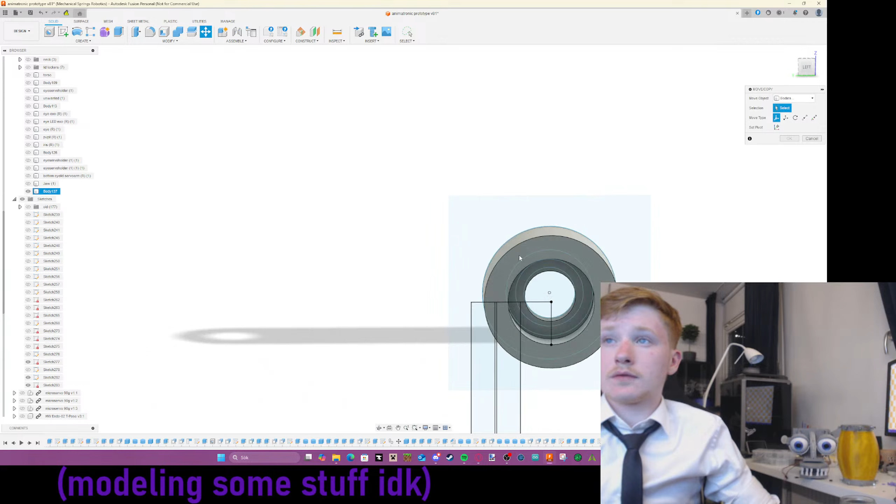Time to do laziness. There's no copy paste thing, so I select it, create copy, and I haven't moved it, but we got another copy now. I need a copy because I need to make the other thingy.

So let's try and make this thingy, right? Join. Not join this - why do I always get reminded of that thing? Let's see which one - this one. Join. Not join this for. And that is outside the thingy.

So I just remembered that. Okay.

What if we have this thingy on the top? I'm pointing, go out a bit more so it fits with this long thingy. I don't want to have to change this one size because I don't think that's possible, so we'll have to make the thingy up there go out so it fits with this and doesn't nudge against anything.

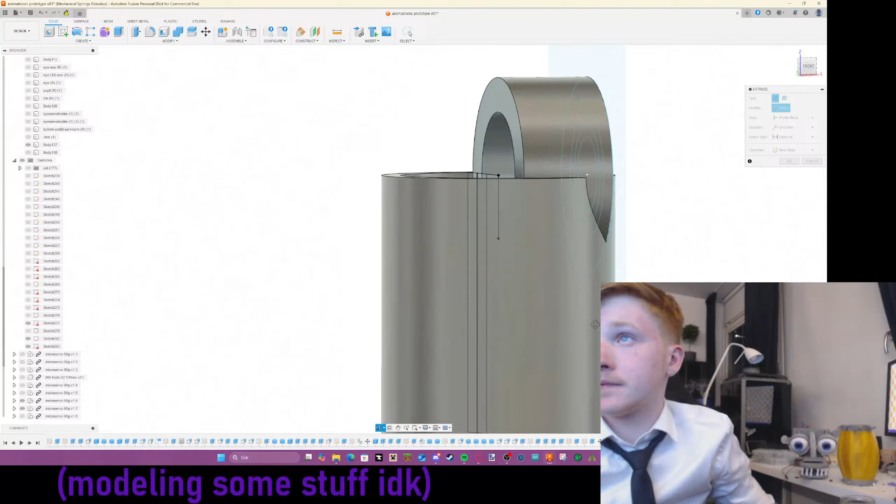Pain. And wait... No, wait, I don't think it hits over there. So we need to... wait, we don't really have to do it a lot, though. Down.

1.5. Negative. Negative. Let's zoom in to make sure it's... oh yeah, it should be the right size.

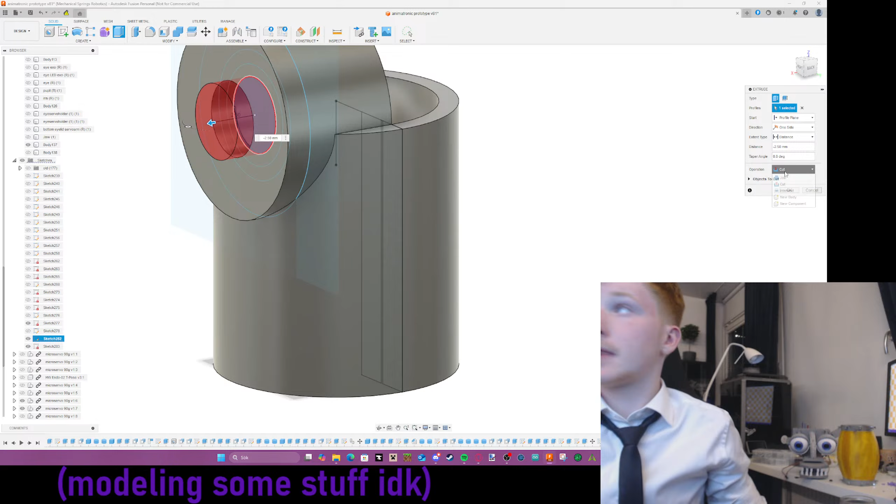Right behind this. I hate this. Wait, we don't... we can actually use that and that too, because yeah, join. Really, I really had to say that word again. Cut. Oh, didn't lag.

I also just remembered, how much did we move it, or like extrude? Cause I have no idea, but we need to remember what we did. I know what you did - edit feature there.

Wait, what the... Oh, we need to do it in this one. Yeah, yeah. No, no, nope. There we go, edit feature, 1.45.

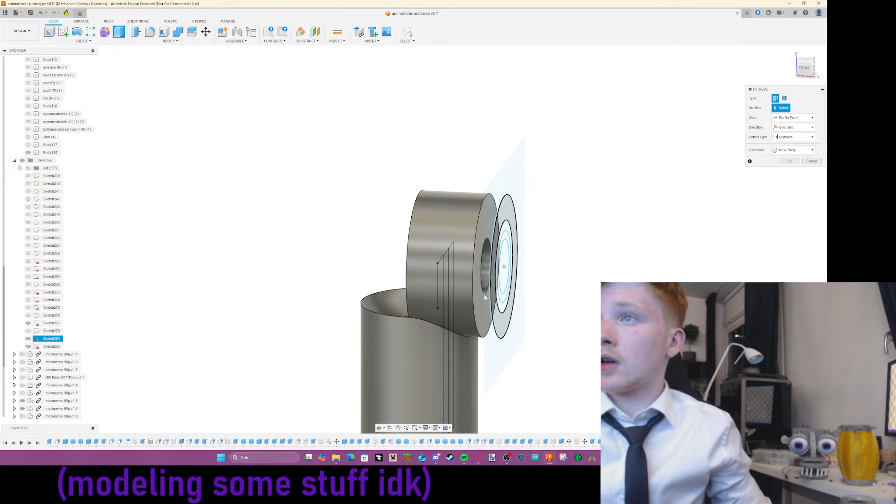So we need to move this. We need to move both this and that. 1.45. And then we just extrude this, 1.45, and everything's back to normal.

Yeah, very annoying working on two things at once. But actually, if we look right now, right here, right in this very moment, we can see how it aligns, how it will do the moving of the inside of this thingy - shablon going into the shablam and they move swing.

Okay, what picture am I looking at right now? And I have a random message. I swear to God, if it's...

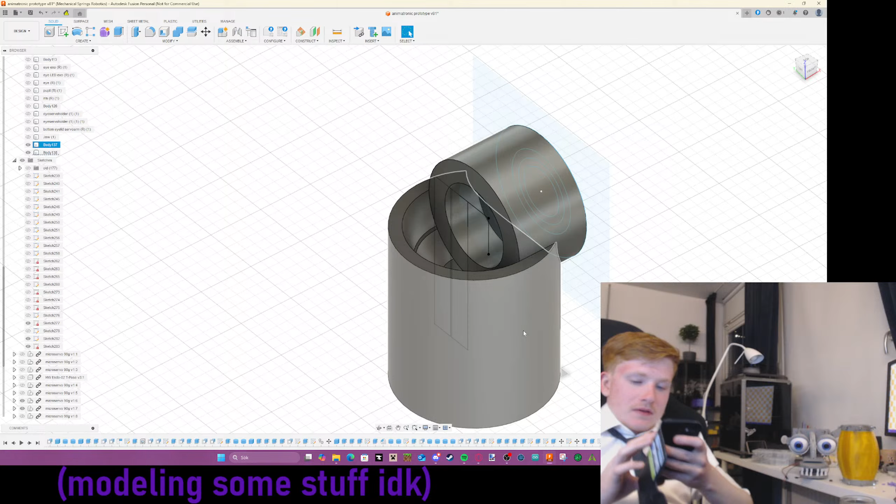We got fucking jump scared by a picture. Okay, that's crazy. Okay, wait, how much is... yeah, the clock is only like 12, almost 12 in the morning now.

Okay, gotta be honest, I'm pretty sure we won't be able to 3D print this today, but we will be able to maybe finish it. Okay, not finish it off, but yep.

Cut. Please don't, I better not see them merging. Okay. Then we gotta hit - okay, which one do we do? We do this one. Oh yeah, let's go, let's go guys. We gotta eyeball it.

So it's like 6.7. Oh, that was pretty close. 75. Did that?

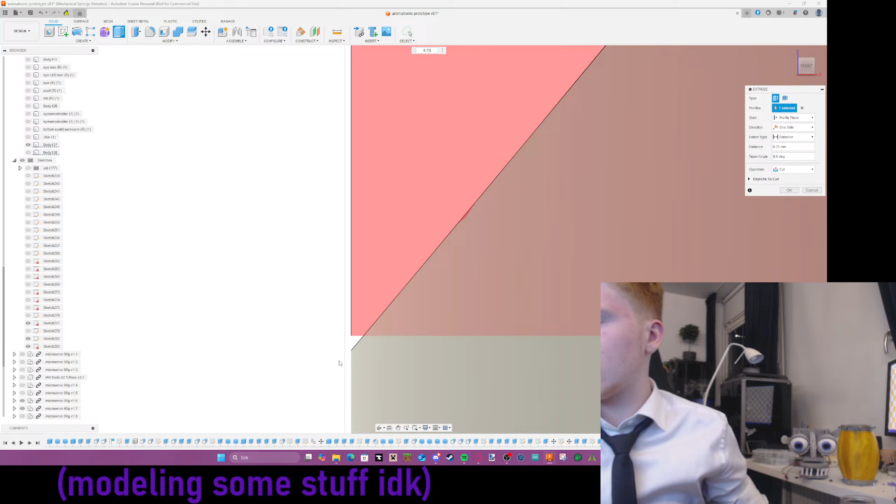Are you kidding me? Or is that just something wrong in the system? Oh no, wait, is it because I went too far over? There's no way that's actually... yeah, yeah, that's aligned.

You're stealing too much of the frame, sir. For me he's super close, but for you guys it looks like he's so far away.

I can just boop. Oh damn! Why does that look so... the fuck? Whoa! Yeah, crazy. Yeah, you stare at that spring lock, buddy.

Okay, the thing I was like scared about, or a bit unsure about, is the assembling thing of the thingy. No, but like assembling that metal thing that goes between them.

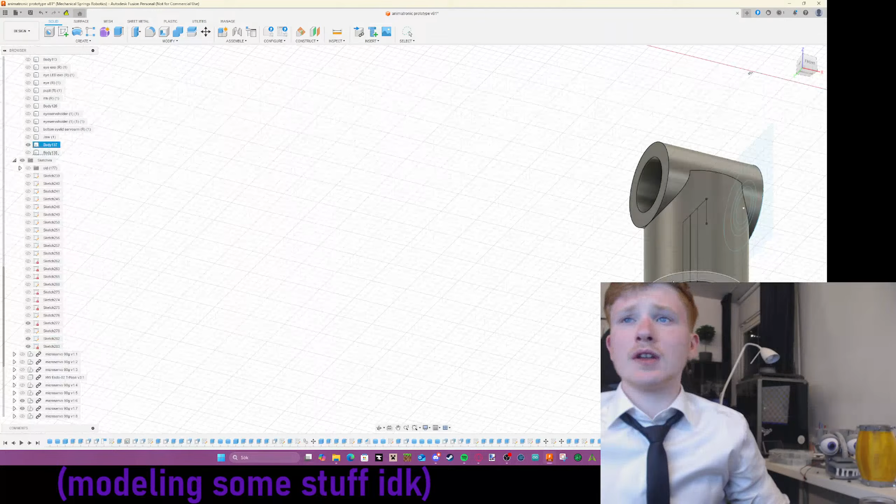This should not create any... oh, because we needed to make the size of the hole, not this hole, but this hole. Okay, why is weird stuff happening? We didn't do this size, we made a bigger size. Now we hide that one and show this one, and now it works.

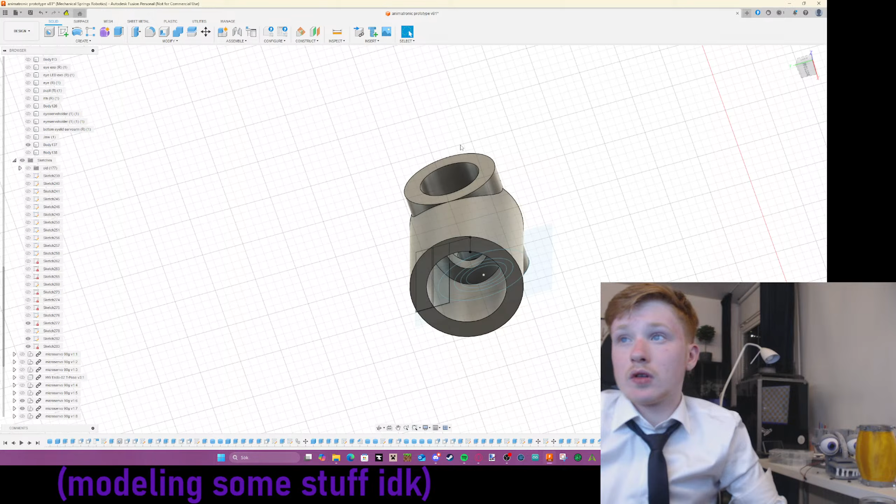But um, okay, I was gonna say I wanted it to be looking better on the inside, but we don't really - we could in some way, but there's a lot of round areas, so it's very hard to do that.

Everything's gonna be aligned at the end, though, so I mean maybe we could try. Let's see here.

Oh wait, that's kind of a Pringles with a hole in it, right? Pringle with hole. That would be kind of cool, a cool shape. I've never seen this kind of shape before on the inside there, which I have selected. Imagine if someone made a ship looking like that, that would be kind of cool.

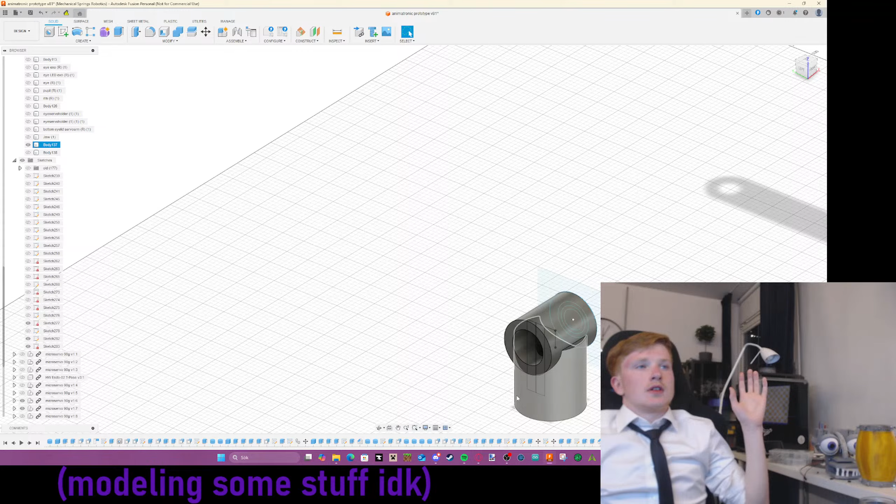Okay, how am I hungry? I ate a huge Chinese meal and a big slice of cake, and I went a little bit swimming, I guess, but the fuck am I hungry? I have no idea.

Okay, I just looked over at the weird or funny looking picture of me, but it's pretty cursed, so I don't want to show it. Okay, pause, that sounded weird.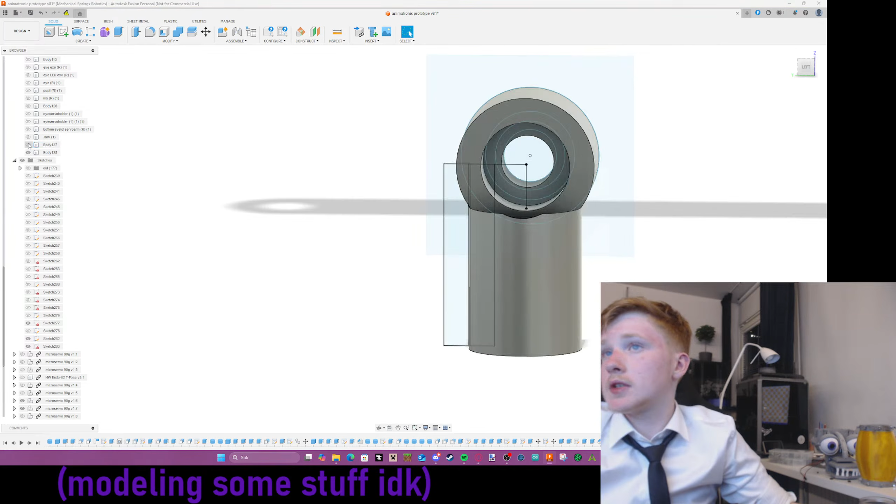I think something we can at least try and do and finish up is the thingies. The thingies. The thing is the thing we've all been waiting for, the thingy.

I love how most of the stream has been me not making any sense to you guys. But, you know, sometimes it's fine. Maybe for you guys, but I'm unsure if it is.

Oh yeah, another thing I'm kind of unsure about is this thingy. So this thingy going in, it'll go with this other thing. I'm not sure if it's gonna fit. That's literally it, you know.

I might as well... oh no, maybe I shouldn't try to 3D print it in just this small thing. Maybe I should try to 3D print it in its whole, that one piece, to see if it would fit, which hopefully it does, because I have no idea how I'm otherwise supposed to make it fit other than having one piece. Oh my! How the fuck did I reference One Piece again?

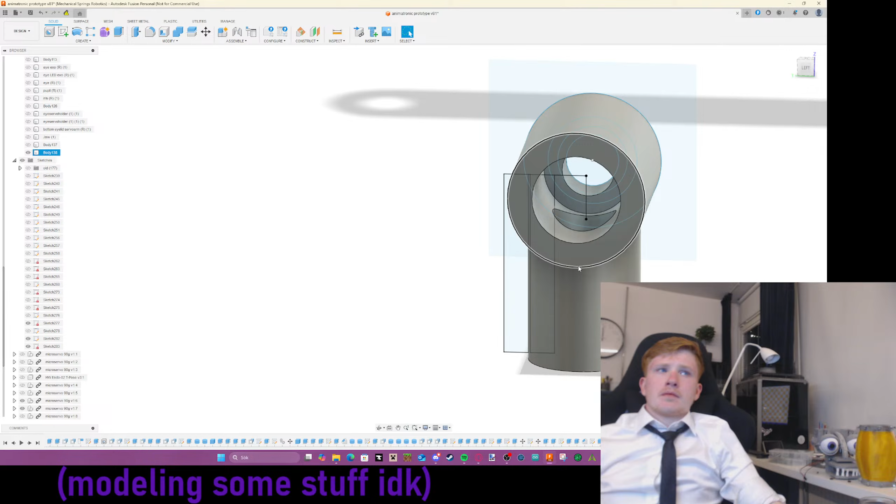Instead of cutting this in half and having the two parts glue on, like what would you call it, a piston thingy? Piston. It's just called a piston.

Okay, wait, let's just take a quick look here. Damn. Let's see, so 15, I'm just gonna move it a little bit more. How many is it, maybe 17? 19, 20, good enough.

This is not the fully final design, we might add some changes to it. So as you can see... okay, we can't really see a lot here actually. Let's just do a section analysis real quick. Yeah, that's good enough, okay. No, show the analysis. There we go.

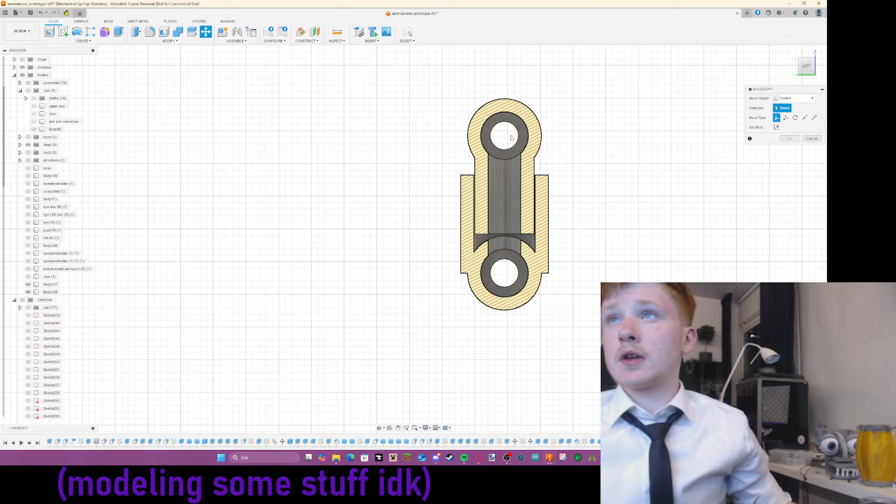So you see we got the top thingy and the bottom thingy. The bottom thingy can slide in and out, you can see the space between them. It should be enough, okay, it should be enough, and it's between these two points, not this, because apparently I can't do it accurately with how much I do the section analysis. But it should be able to move, it should be able to turn too, because of this, the whole thing. I don't know.

I'm just fucking around at this point. We haven't made the thing that goes in between here, but you can see if I would drag this up, this would dislocate, right? It would pop out and then it could possibly go like that, right?

I don't know how I'm supposed to do this thing. I got two solutions: we have the thing come out of this into here, right? I don't know how I would have that work. Probably... no, that would not work.

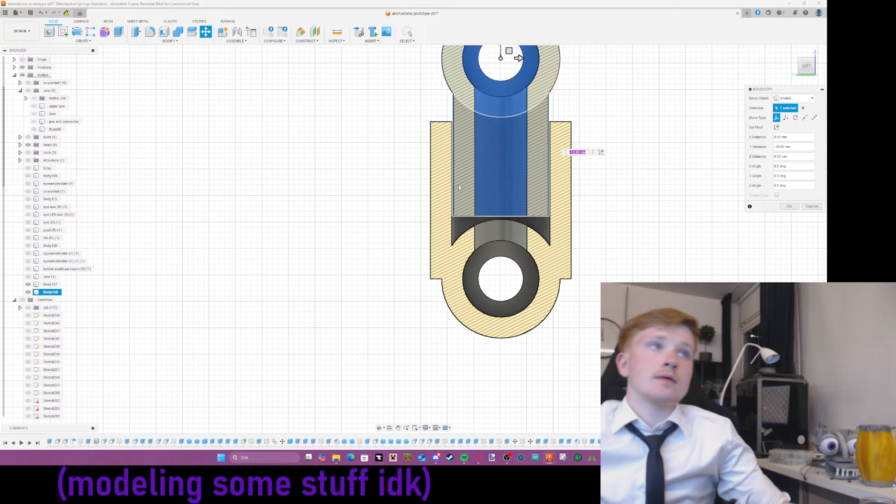Second idea, we have the thing go from this, so we have... wait, would that even work? Oh yeah, it would work. We have the thingy go on top of here, we maybe screw it on or something. There is more space on this. What? Wait, what the fuck? Why am I not just screwing a screw in here? That's the point.

Imagine this, this is not that simple, but I have this go in here or something. I screw that in, and then the point on top connects in. It still can't turn side to side, you know?

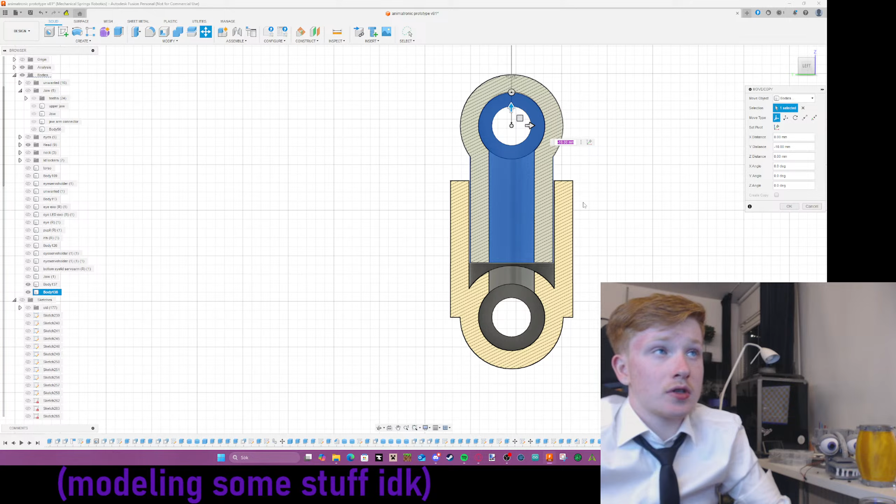Actually, that's much smarter than I had before because that makes it use less pieces. I mean sure it uses two screws, but it would probably already do that if I used another part. But it's simpler, and it might even be more effective. Probably not, but the assembling process is much easier now. What do y'all have to say?

I'm gonna just get up a thingy. Oh no, wrong thing. Wrong thingy. Let me quickly take a screenshot here. Yeah, whatever.

Ooh, my favorite thing to draw on, which I suck at doing. So yeah, we have... okay, maybe we should do it in a more colorful color, like red. So these are the points, like where it would, where the hole would be. So basically it would be like that, you know. But then we have the screw, and the screw goes through here, you know.

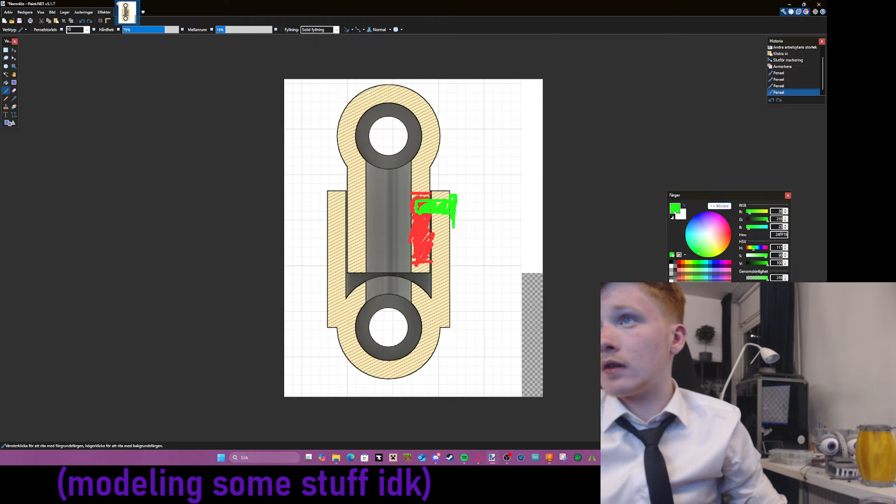Okay, that's a very bad screw tip, but you see, it goes in there. Right now, if we would try and push this down, it would hit over here. And if we would move it up, it would hit over here with this, and we would not just have this on one side because the force of this would make it go like this. If we pushed it down, it would tilt down over here but tilt more up here. If we pulled it, this would be further up because this actually touches here. That's why we have it on two sides.

I think I made myself pretty clear there. You can just watch this and understand, oh yeah, that's not gonna move anywhere. And disassembling, you just screw out two screws. That easy. And this shouldn't come in contact with the spring.

In case it does, I always have super small screws which can fit there, and I'll just thread them into the plastic. This was a super simple solution. That's the best solution we have right now, the best one in production. It's just so simple and effective.

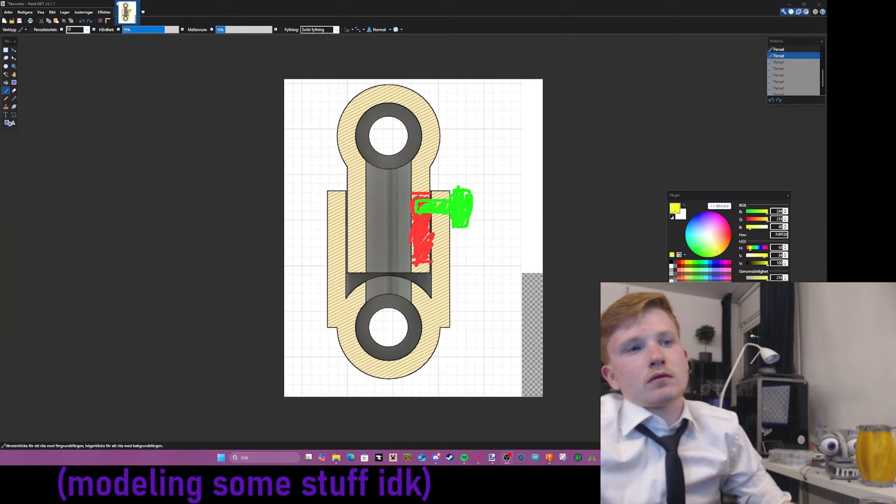Okay, I think... oh, whoa! Hold on. Let's do this first, I wanna just show something before I leave. Look at this nice thingy. It's weird locking it with nuts, but it does a thing. At least it doesn't just look good, it does something, but I don't use it. I just wear it sometimes because it feels cool.

It looks a bit weird, sure, but it's one of my biggest spring lock stuff I have, and dangerous because this actually can give you some marks, which I don't have anymore thanks to time removing scars. Not scars, it didn't really make much of a scar. But look at this, if I turn the lights purple, now the shadows on it look red. Let me just... no, not red. Maybe it's the light from the monitor doing that.

But we also got this, as I showed some times before during the stream. Yes, the prototype of the new springs I have. I have about 40 of those, I think. Okay, my hair looks so flat. Okay, now my hair looks a bit too crazy, but you see, it moves all the way down to the nut, I think.

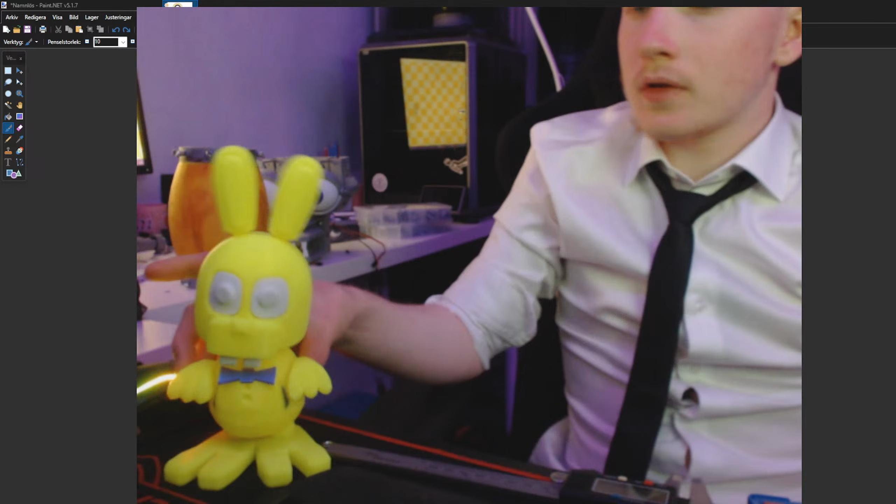Whoa. I didn't used to have this guy, but I can just put that back on. Let me just move you over here. Don't, you're gonna fall over. Stay there. And his bow tie fell off.

I also have this for him. His legs are hollow, so I can add sand or something heavy in there so he doesn't move around. But I don't think that's a problem anymore.

But we also got, dun dun dun, a Fredbear bobblehead, just because of the funnies.

And these aren't the final versions because, well, I wouldn't say much of a friend of mine since we never talked a lot, but a friend of my friend Funner, he's like a pro modeler.

He models for a lot of famous YouTubers, like, I don't know, AP Angry Piggy or something. He's a pretty popular song maker too, and he's also friends with Dawko, so I kind of technically got a contact connection with Dawko, I guess.

But he's made some awesome models. Oh god, hold on, let me show some of them.

I must save this, I'm gonna take a screenshot. Ooh, don't show it down here. Oh yeah, good, I'm just gonna show this.

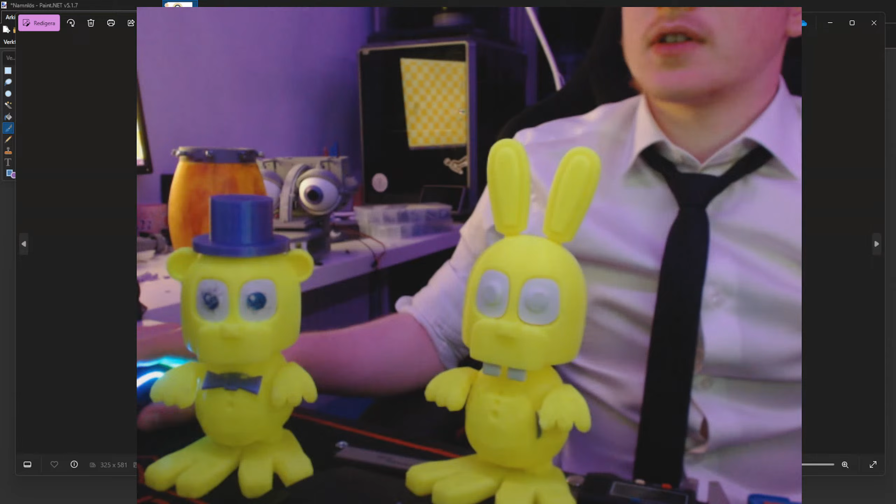So first of all, this is the first one he made. This is just a picture right now because I haven't gotten the model yet since I haven't asked, I'm more in work with all of this, but it's pretty accurate to the actual source material.

Let me pull that up if I can find it. Right here, I think, yeah, this is it — not the exact reference material, but here's like a close one.

Hold on, let's put this side by side. Okay, I can't really put it side by side. And then we have this over here, and there's just me on the bottom. You can see it's super accurate.

I would say it's a little bit squashed, but it's good enough — it's good enough because it's instantly recognizable and looks how you remember it.

If you have it side by side and analyze it, you'd notice it's not exactly exact, especially since we didn't really get a front pic of him for this. Oh, I just also showed that image.

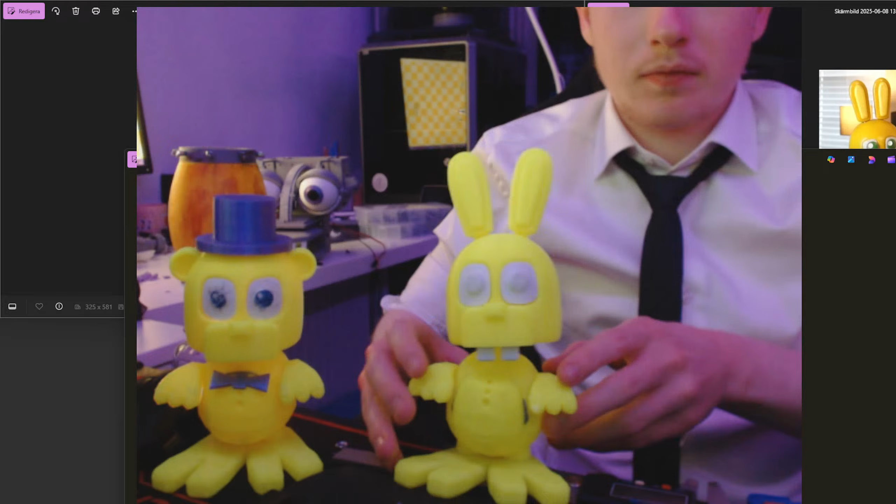But highlight-wise, I'd say these are more FNAF 3 styled, while the ones that Steel sent are more like an updated version. Let me get a picture here.

FNAF 3 bobblehead. Why is there like nothing about them? Oh.

Oh my god, bro. Can't really show a lot, but it's pretty close to it, I guess. The snouts are a bit bigger.

Thingies. Oh, you can't see. You gotta be kidding me, you gotta be freaking kidding me — I haven't shown anything, my camera was in the way.

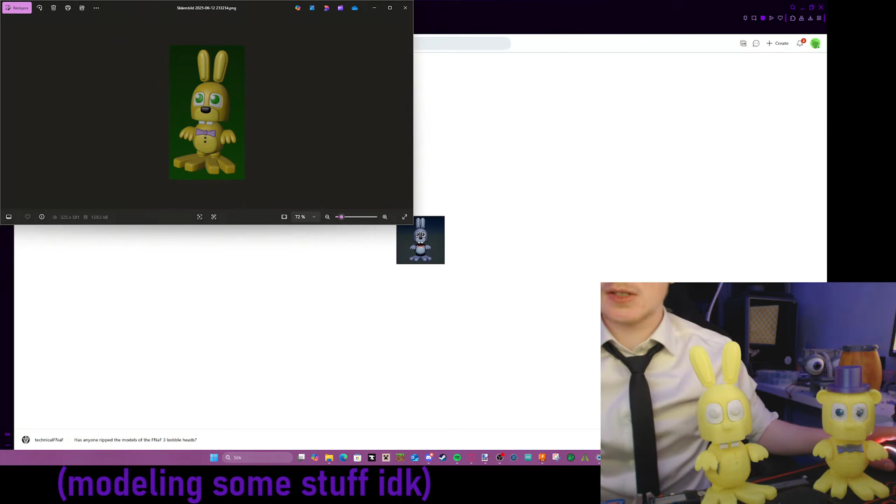Let me show these real quick. So this is the material that he showed, this is what he's made, and this is the material.

No, that isn't just that — this is the Fredbear one that I was talking about. He didn't make the ears like the one I made, because I made mine accurate to the FNAF 3 models.

He had endo-like ears on it, like they did to the Spring Bonnie, which this model actually has, and which is also in the FNAF 3 one.

Okay, why are you staring at the camera?